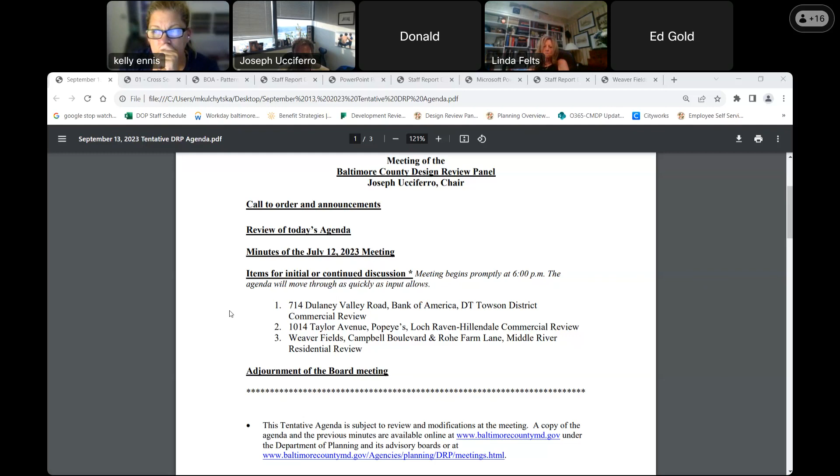Thanks, Joe. Good evening, everybody. My name is Matt Renauld. I'll be helping Joe out here on the project. The first item on our agenda is the Bank of America at 714 Dulaney Valley Road in Towson in the Downtown District Commercial Review. If the presenter could introduce yourself, the floor is yours.

Hello. First, I want to thank the panel for taking the time today to discuss the Bank of America Dulaney Plaza project. My name is Eric McWilliams, a professional landscape architect with Bohler. With me today are Melissa, the project architect with Interior Architects, and Lloyd with CBRE, representing Bank of America. So if we just jump into the comments, there was a concern about the retaining wall.

And Marta, if you would mind jumping to page 13 of the pattern book.

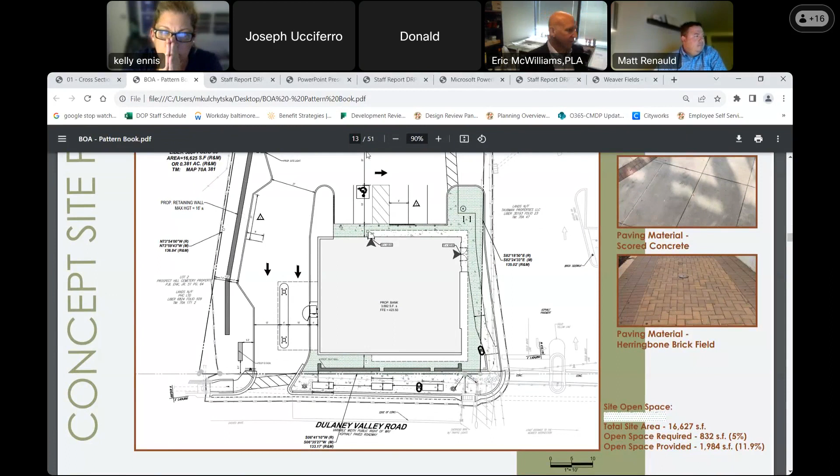So on the left-hand side is the retaining wall for the site. There's currently a retaining wall on the Bank of America site. This will be a reconstructed, rebuilt wall. We've taken the panel's concerns to heart, and we've reconfigured this wall with a maximum height of 16 feet, kind of in the center there. What's to be noted is the current wall curls down, basically touching the SHA wall on Dulaney Valley Road.

We've been able to regrade this portion of the site, widening out the landscaped area where the pylon sign will be. So we were able to pull back the wall 18 feet off the property line from Dulaney Valley Road. We feel this will give ample buffer room to soften the view of the wall from the public street.

This vegetative buffer along the base of the wall extends throughout the whole site. It's about 4 feet where there's parking, but in 2 areas without parking, once you go back beyond that 18 feet to about 40 feet, it's at least 10 feet wide, and we'll be planting larger vegetative material there to soften the wall even more. There's also a bump out behind the main row of parking on the western side of the site.

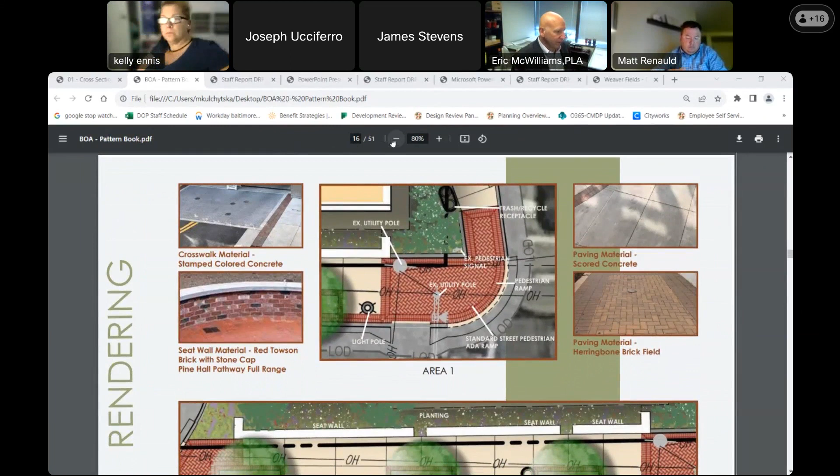If we can move on to the streetscape, page 16. This is in front of the site along Dulaney Valley. It is a seating wall with returns on both the northern and southern portion of the wall, as requested by the panel, and it'll parallel Dulaney along the entire facade of the proposed structure.

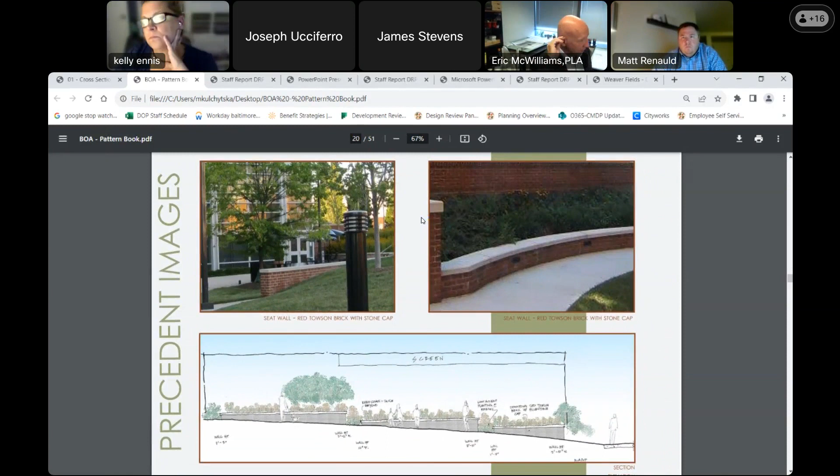If we could jump to page 20, this gives a cross section of how this wall will look along the street. It'll be stepped as Dulaney has a slope from south to north, following that slope with small gaps to give it some air due to the extent of the slope. The height of the wall will not exceed 20 inches, so it'll be comfortable for folks of various sizes waiting for the bus to choose a place along the wall to sit.

Being able to see this bus stop area from my office, sometimes there's 5, sometimes there's 25 folks waiting there, and they sit all over the place and like to give themselves space. We feel this seat wall will satisfy the folks in this area—those waiting for the bus can utilize the seat wall all along the frontage.

To further dig into the bus stop area, there's been mention of a bus shelter, and we feel this seat wall is a great option in lieu of it. The bus shelter would be a bit crammed with the width of the street in this area—it would have to sit back behind the 5-foot minimum sidewalk, in back of the planters, almost shoved up against the Bank of America building, and would tend to clutter the view shed as you're coming up Dulaney Valley, in our opinion.

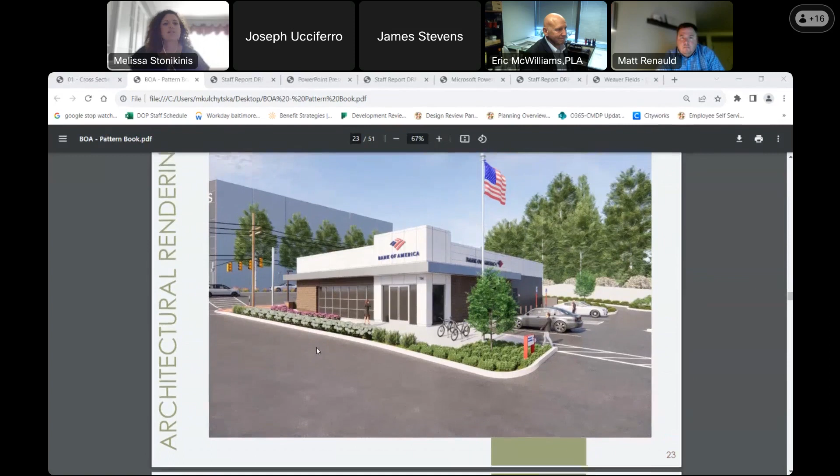You can jump to slide 23, please. On this slide you can see the rendering of the northwest corner of the building and the main entry tower. Here you'll see some of the material upgrades we've made to the facade, including replacing the original wood-look metal cladding with a brown ceramic tile, and replacing the stucco with a full-height charcoal brick around the rear of the building. These changes still maintain our initial facade colors, which align with the bank brand standards, and still complement the adjacent center facade aesthetics, which Taubman Properties have given us support of.

You can also see in this image a little bit of the retaining wall at the rear of the facade, at the rear of the parking lot, and as previously discussed, that's been shortened in height a little bit. You can see those planting areas in front of that, which will provide more visual interest. You can go to the next slide.

This rendering shows the northeast corner of the building along Dulaney Valley Road, and the center entrance. Here you'll see more of that robust planting scheme we're proposing, which responds to the architectural canopy and windows, as well as the proposed seating wall, which we've articulated more to provide pedestrian function and more visual interest with the interacting landscape.

We have maintained the smaller glazing along Dulaney Valley Road in order to promote customer privacy within the private offices, which also aligns with bank security protocol. But we do believe that the variation of the fenestration pattern does help differentiate the more private office spaces from the public open waiting area.

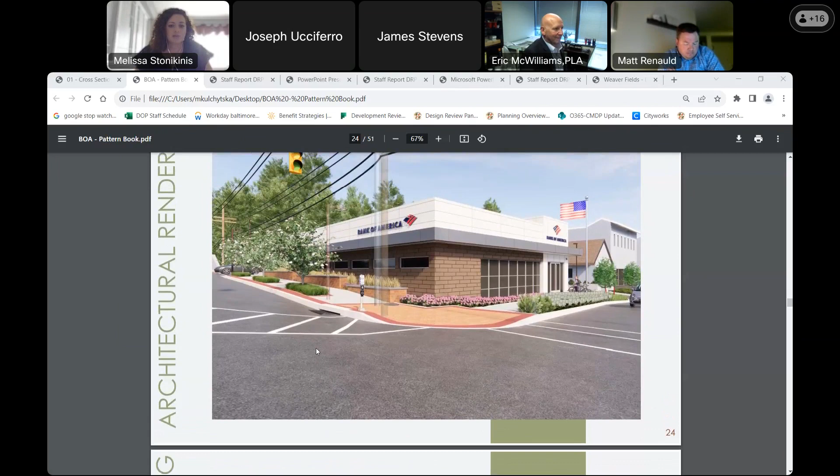Again, you can see a little bit more of that facade material, brown ceramic tile. We also shifted the signage closer to the corner of the building for better visibility.

This view is of the southeast corner and the exit of the site onto Dulaney Valley Road, and you'll see a better view of the charcoal brick that we're now replacing the previous stucco with, and we decided to bring it full height, around the back and with the ATM drive-up area.

Again, you'll see more of that seat wall and how it interacts with the landscape and the building. That seat wall will utilize the red brick to tie into the streetscape, and then a dark gray bluestone cap to tie back to the gray facade materials.

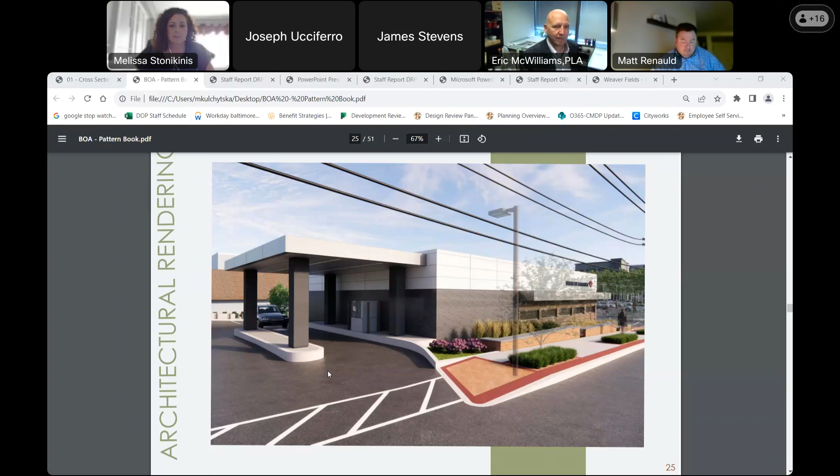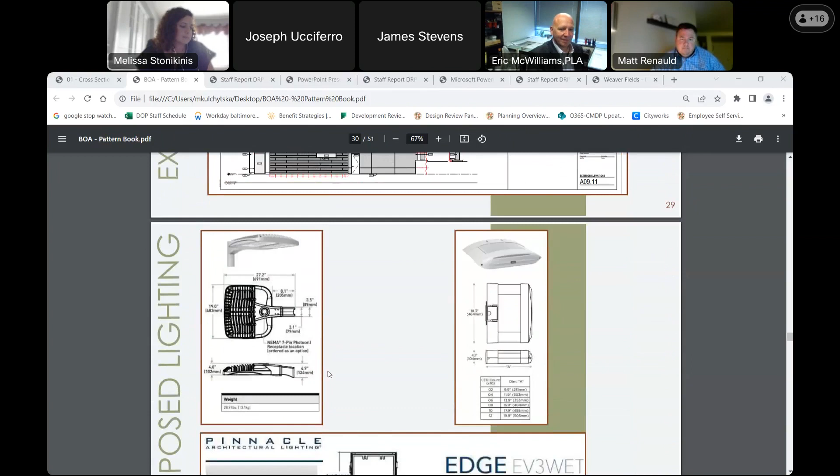There you'll see the new brown ceramic tile and the gray brick. The remaining slides are of our proposed signage, and the only notable changes are on slide 33, the site plan. We're including markings for 3 employee-only parking spaces along the retaining wall, and shifting that building sign closer to Dulaney Valley Road at the corner.

And that concludes our presentation, so I will turn it back over to the DRP.

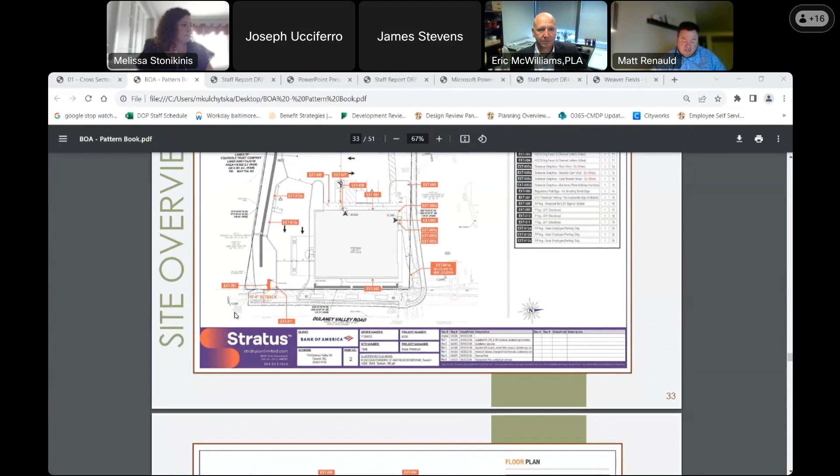Marta, is there anyone signed up to speak on the project tonight? Let me check with Brett and Jen. Brett, do we have anyone? Yes, we have Miss Beth Miller from 523 Murdoch Road with the Green Towson Alliance community group. I think I have to make her a panelist. I'm sorry, hold on.

There's my, hello. Thank you for this opportunity to provide comments on this project. My name is Beth Miller, and I'm submitting comments on behalf— Excuse me, I'm sorry for interrupting, but I would need to start my timer. Beth, are you speaking on behalf of the community?

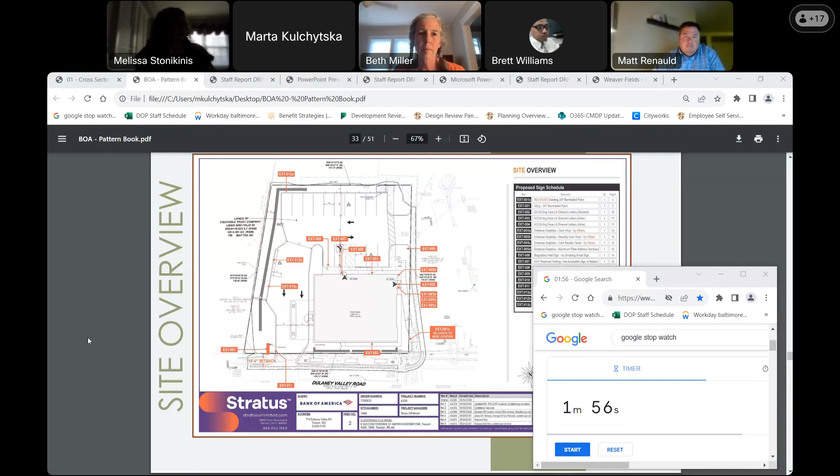I think at this time, if you are able to read the staff report, that would be appreciated. Sure, thank you. So the planning department prepared a staff report, and the report will follow the Baltimore County zoning regulations code references for the project's conformance with the regulations as set forth in section 259.16 Downtown Towson District.

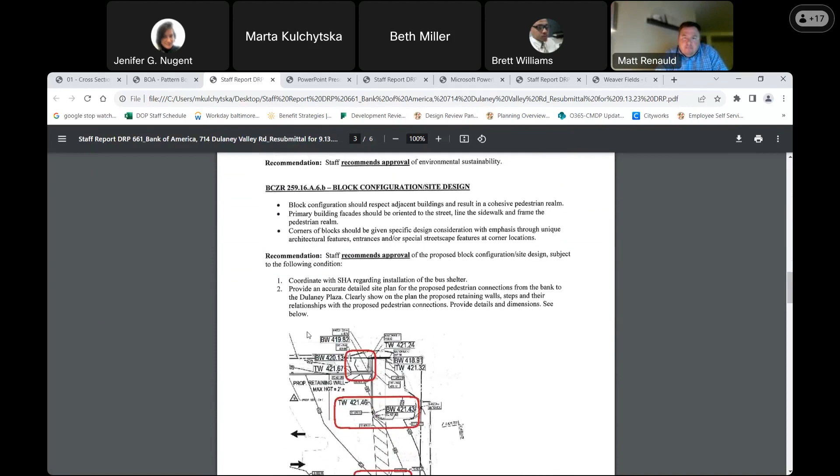In regards to environmental sustainability, staff recommends approval. In regards to block configuration site design, staff recommends approval subject to the following conditions: Number 1, coordinate with State Highway Administration regarding installation of the bus shelter. Number 2, provide an accurate detailed site plan for the proposed pedestrian connections from the bank to the Dulaney Plaza. Clearly show on the plan the proposed retaining walls, steps, and their relationships with the proposed pedestrian connections. Provide details and dimensions, see below. So we provided a diagram below.

In regards to parking, staff recommends approval. In regards to downtown open space, staff recommends approval. And in regards to building principal architecture, staff defers approval of the proposed architecture to design review panel. And in regards to building materials, staff also defers approval of the proposed building materials to the design review panel. And for the signage, staff recommends approval. And for the lighting, staff also recommends approval. And this concludes our staff report.

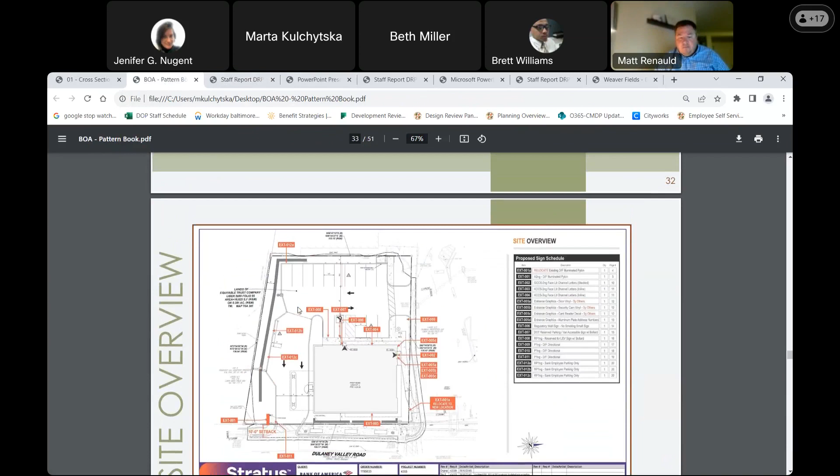Good evening, everyone. Last but not least, it's me. So I concur with the staff report. I have just one question which I want to confirm. Since this is a rendering, is that sidewalk in compliance with ADA? Looks like the tree planters may be eating away into the space that's required for the sidewalk.

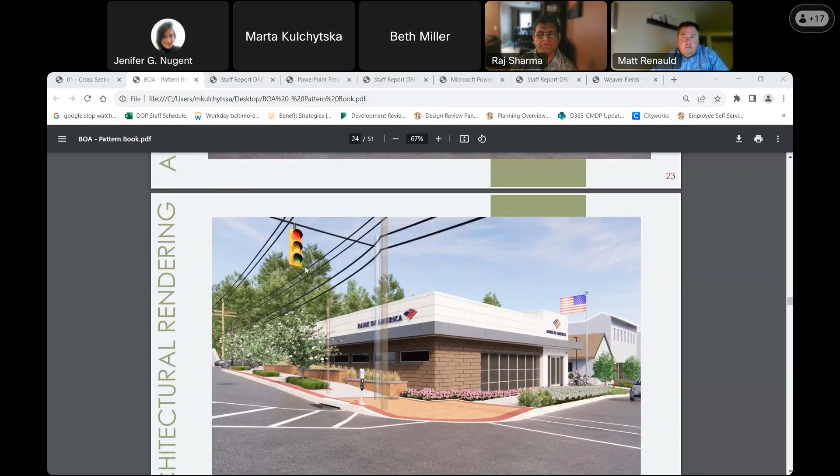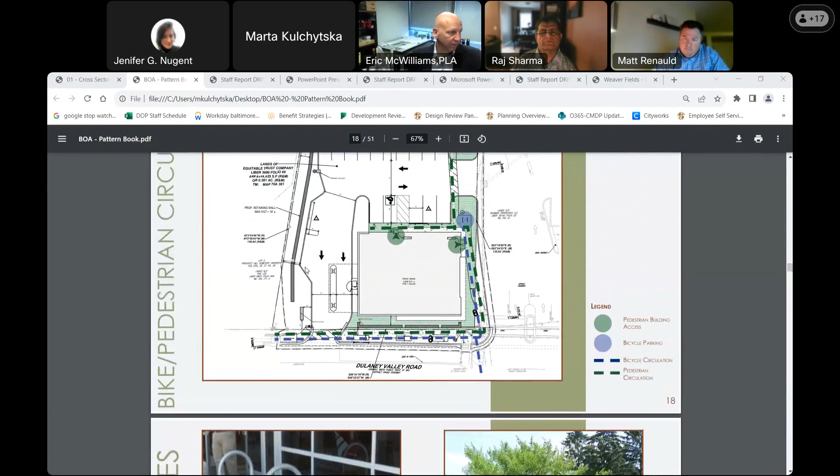Would you like me to answer that? I think that would be acceptable. Please go ahead and answer that question. Okay. Yeah, the site will be accessible, ADA accessible, along Dulaney Valley Road. The tree planters are situated so there will be a minimum of 5 feet between the seat wall and the planter. Thank you, that's good enough.

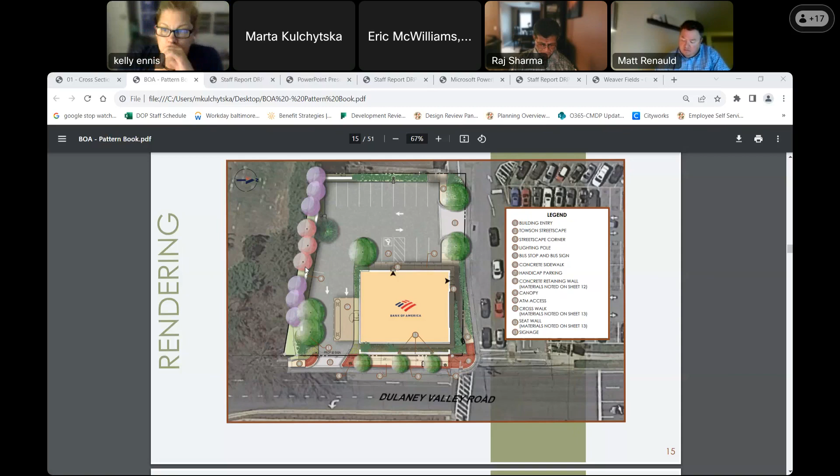And I guess all of my comments are really positive comments. The 16-foot retaining wall has been softened to a degree that I'm comfortable with. Also, the finishes on the exterior elevation, I'm totally on board with. And I must say, the stepped tiered seat wall on Dulaney Valley Road is really a good improvement from the continuous wall that was there on the last submission. So all my comments are positive.

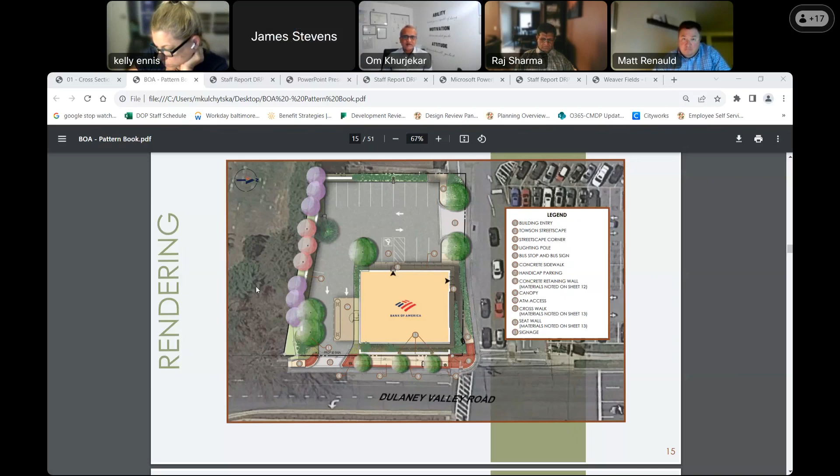Thanks for a great presentation. I think I generally concur with the staff recommendations. I do have a question regarding the materials of the seat wall on Dulaney Valley. I do like the configuration of it, and I appreciate the fact that it is a seat wall that steps down with the grade. The renderings show a lighter or more reddish brick. And when I look at the architecture, is there any way to darken that brick up so it has a better tie with the architectural facade?

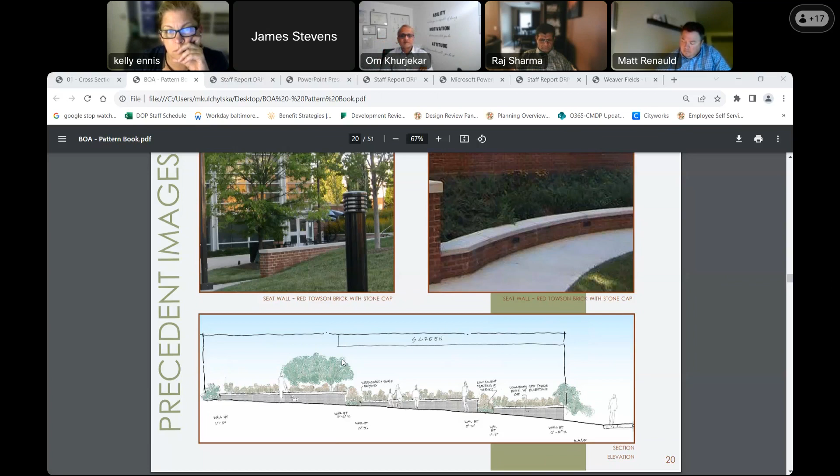I enjoy the grasses behind the wall, and I'm wondering whether in the view that you all showed, that is at the entry, there looks like there is some pink shrubs. I'm wondering whether on either side of the wall there's a way to extend the grasses to wrap around.

And then the third comment I have is regarding the ginkgos. It's just a recommendation for your consideration. A species of trees that may work in those situations would be a sweet gum, not the seedless variety, that is a little more columnar. And that's all I have. Thank you. Great. Thank you very much.

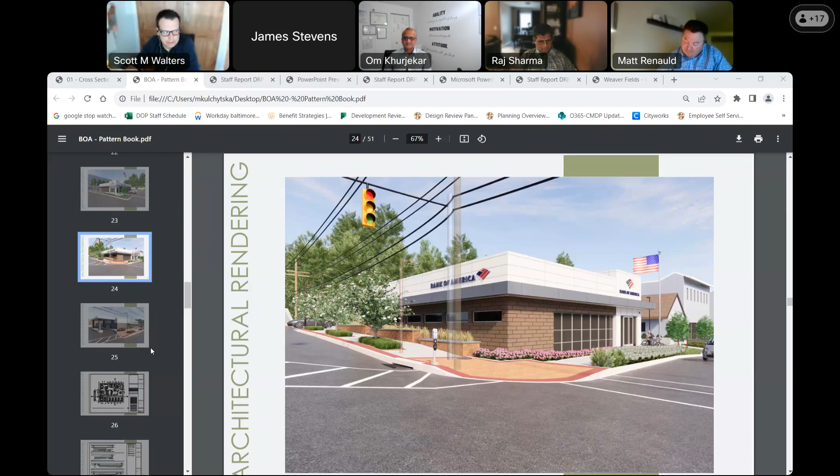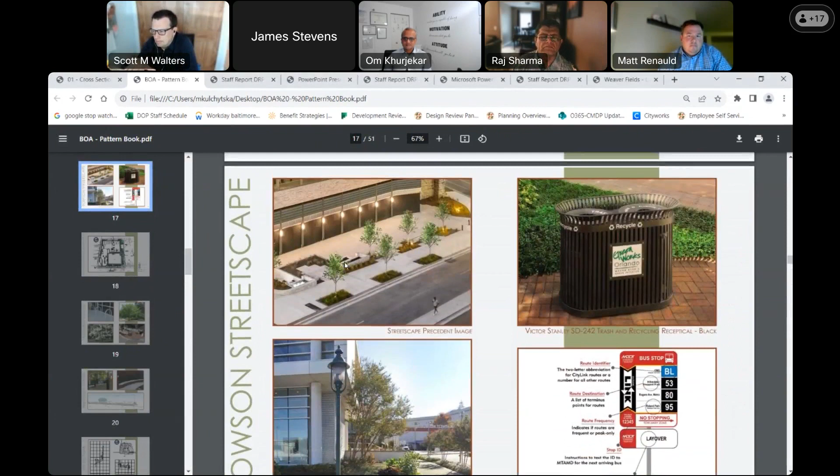With regards to the site plan, I actually like the seat walls and the steppy nature of them. The question is really around the bus stop itself, on I think it's maybe page 16. The three planters themselves aren't equally spaced, but where the bus stop is noted to be is in the thinner section between, if you're looking from the right, the second and third tree, which has the smaller section between the two trees. I was wondering, was there any thought given to giving some hierarchy to where the bus stop and the signage should be between the street trees, in the whole sequence of getting on and getting off?

Would the applicant like to respond to that question, since it's specific?

Just to make sure that I heard the question correctly, your concern is that the area between the two planters that seems to be a little tighter is where the bus stop is, and could we give consideration to perhaps evening up those planters in order to give more room? Is that correct? Should there be more space given to where the bus stop is versus having it be the smaller space between the street trees?

Yeah, as far as I understand it, there would be no issue, I think, from our standpoint as to sliding that planter up a little bit, just to make sure, with the caveat that there's no utility conflicts in that position. But if there are no conflicts, I don't believe we would have any concern at all with giving a little bit more room there for the bus stop.

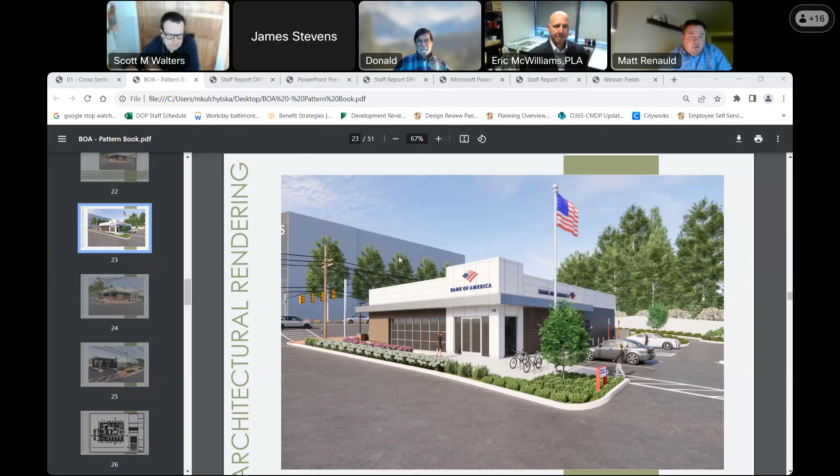I think it's just an item in the rendering, on the corner rendering, the hardscape is showing up as kind of that old Towson yellow brick and the red brick. Can you confirm that it will just be the red brick and not the dual color? Perfect, thank you, much better.

My last comment is regarding the planting at the retaining wall. That is much improved. I would just encourage you to evaluate what you're planting at the base of the wall. I think it's a ginger that you've got proposed there, which is going to be fairly low. I would still recommend you try to get an evergreen shrub along the base of that wall to get 30, 36, 48 inches of height there, just to take the base off of it where you can. It's still a substantial wall, but if you can just land it in a stronger planting bed, that's going to work well.

So those are my comments. So as chair, I'm going to turn it over to my fellow panelists to see if one of you would like to take a stab at a motion for the project.

I would like to make a motion to approve the project with recommendations from the panel. If we're going to do that, you'll have to take the recommendations you want in the motion and spell them out for everyone so they can be in the record.

Okay, I'll try this again. Sorry, my first time. No worries, it's your first time, thank you for taking it on. I would like to make a motion with the following recommendations from the panel. Consider the following items.

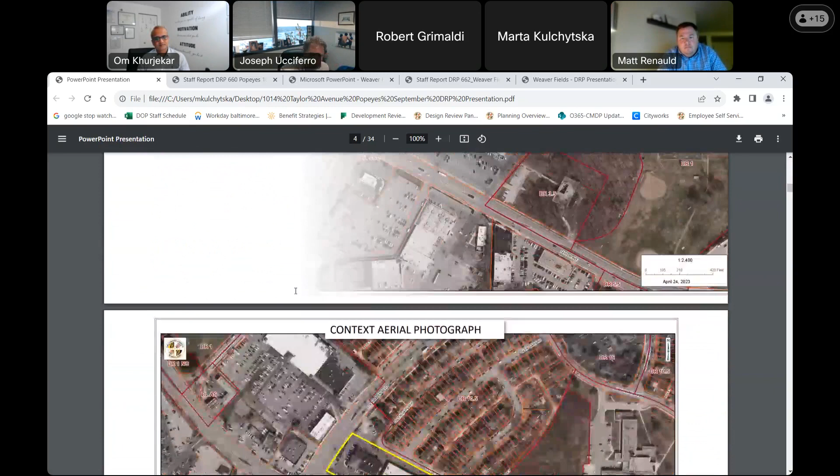You guys have the same slide that I have up right now. Marta, I guess you could start paging through them. Again, we're a 2,500 square foot drive-through, and this is, you can stop right there a second.

I know we have a few new members to the board. That is the site that we're going on. We're in the lower right-hand corner. If you could go to the next page.

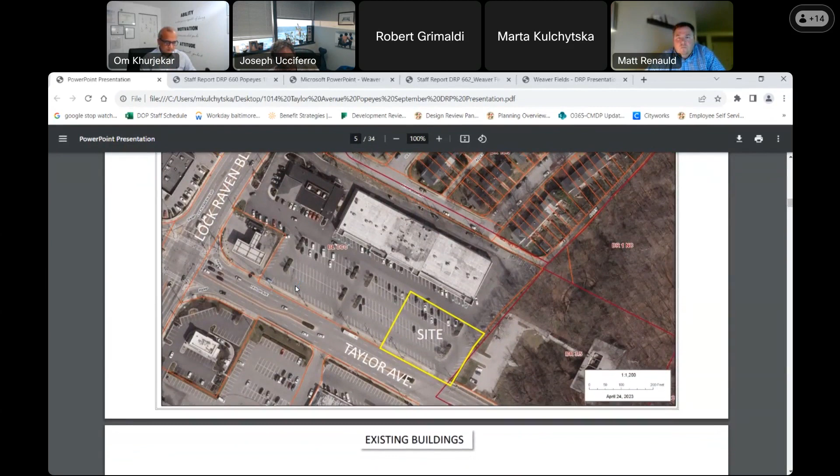And that is the site where we're going on to there. This part of the parking lot drops down, as you'll see in the upcoming pictures and site plans. This is basically the entrance, if you can stay there a second, entrance off the street.

And as you could tell, the site slopes dramatically from left to right, and it also slopes from the buildings towards the street. So we are over to the right-hand side of this, so we have a double point of it dropping. And that'll come into play when you see our retaining wall. This is of the strip center that's behind us.

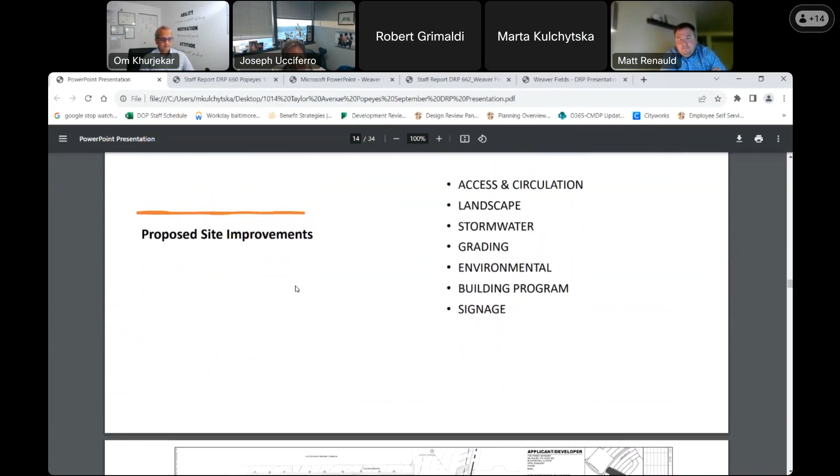Unless anybody has any questions regarding the zoning map, we could move across that and we can come back to it if anything's needed. Stop a second. The next few pages will show the access, the stormwater, the landscaping, grading, environmental, and the building and signage.

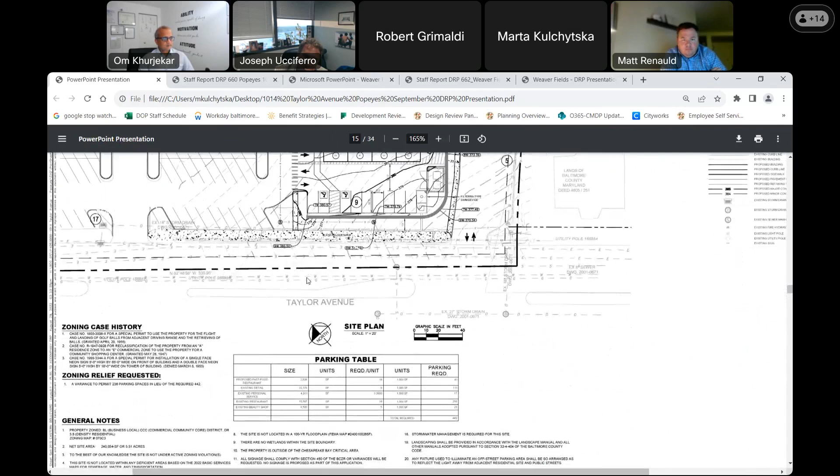Continue on, Marta. Thank you, Rick, again. This is the updated site plan, and actually, Marta, the next one is an enlargement of this. So you could just go to the next one and there we go. So this is basically, we've refined the original plan, slightly adjusted the building footprint, added some additional crosswalks as well as sidewalks, adjusted the planting area, which you'll see shortly, and just refined the plan based upon the comments of the board. You could continue, Marta.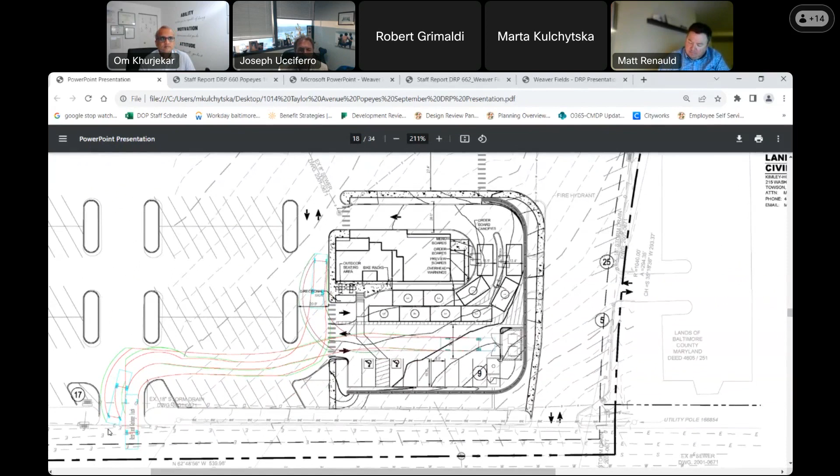And again, the trucks that we went through the deliveries and the trucks that would be servicing this site. Basically, coming onto the site, as you see there, would be the truck to pick up the dumpsters. The only other large truck that's going to come on site, and it usually comes in the time frame of somewhere between 11 and 6 a.m., is the once a week tractor trailer that is the full store delivery.

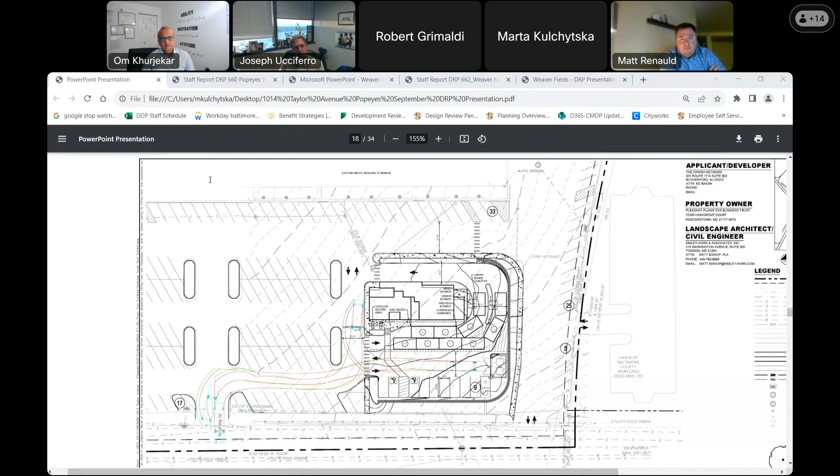The only other trucks during the week are a smaller box truck that comes typically between 7 and 10 a.m. and before the store is open, and that simply could fit in a parking spot, offload, and get out of the parking lot. You could continue along to the next slide.

None of this has changed. These are foundation drawings for the menu boards and overhead detectors and such. Continue on, please. Typical details for the trash corral, showing the materiality and the general construction methods.

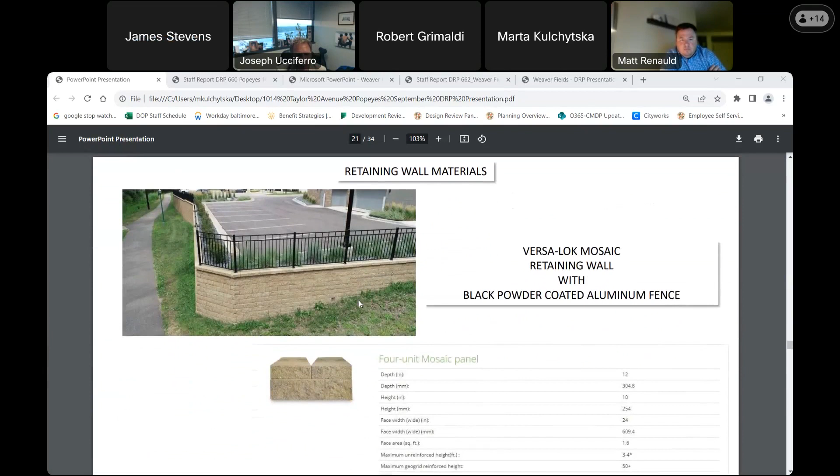This is a specific assembly for the retaining wall. It would be a Versa-Lok retaining wall with the powder-coated aluminum handrail on fence rail on top. Continue on.

Now this is where again there's two sections cut on this site plan, the A section and the B section, and this was the board rightfully asked for this because it was not very clear without these sections about what was happening on this location. If you continue on, and if you could zoom in a little bit.

So the A section is from the street to the strip mall behind us, which is on the top of the page, and the B section is on the bottom of the page, cut parallel with the road. This also helps you understand where the A section falls.

If you look at the A section, you see the existing sidewalk and a person walking on it, and the height of that wall. We tried to soften it as much as we can, but at the A to A1 section cutting through the site and through the B section, the lower section, that would fall between where it says planting and retaining wall.

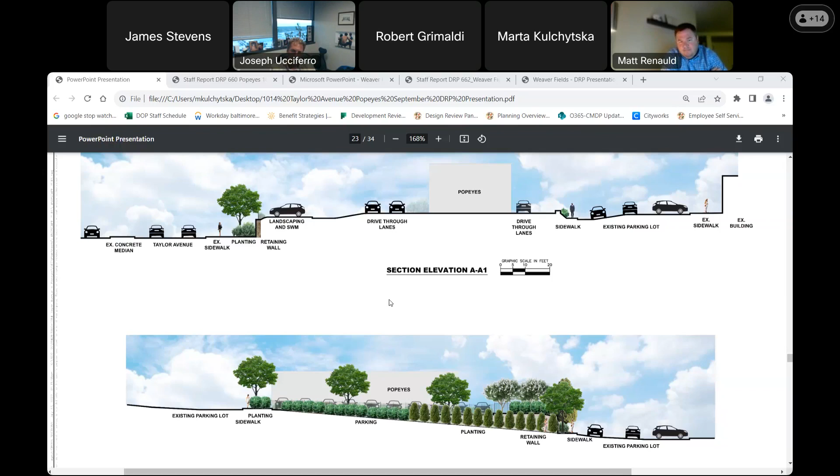Correspondingly, as you drive into the parking lot from the street, the road rises back up to meet the stores in the back. So this is the apex of the height and exposure of the face of the retaining wall.

As you go to the left and back into the site, that retaining wall height is lessened. So in the A to A1 section, we're showing almost the highest point of that retaining wall. Everything past that, both to the left and to the back, gets diminished from that point.

If you could continue on, Marta. And again, I apologize, I'm just an architect, not a civil engineer.

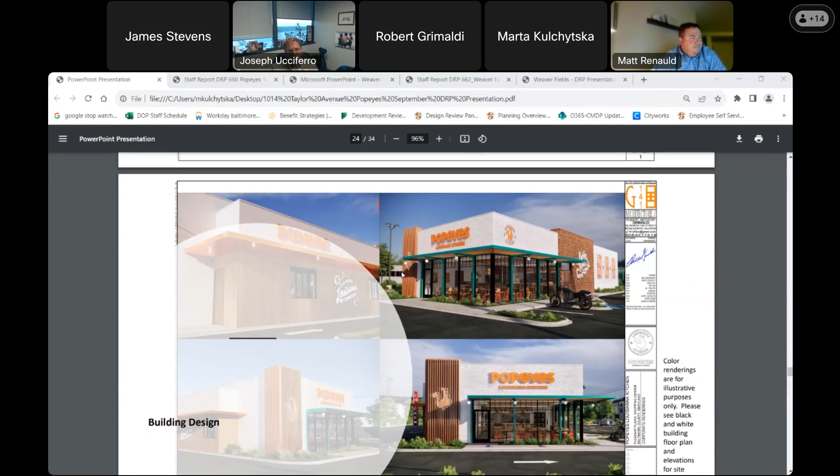So these next few pages are from the prototype design. This is where we had a point of contention, because we had gone through some value engineering from these original designs to what we presented to you last time, and the board was disappointed that you weren't going to get the full gamut of the newest prototype.

So as per your request, we brought back a lot of the features, especially the full awnings along the dining room with the lights and everything else. We had taken that away in the last presentation, but we brought it all back as per your request this time. Continue on, Marta, thank you.

You could keep going, and then we'll get to the actual drawings. Keep going. Okay, if you could zoom into that just a little bit, to that first plan.

One of the board's comments was that, rightfully so, we had EIFS coming down to the ground. It's hard to see in the plan, but if you zoom in more and compare this plan to the original, the building has grown about a foot in overall length and width because we added full face brick wainscoting to the footprint of the building.

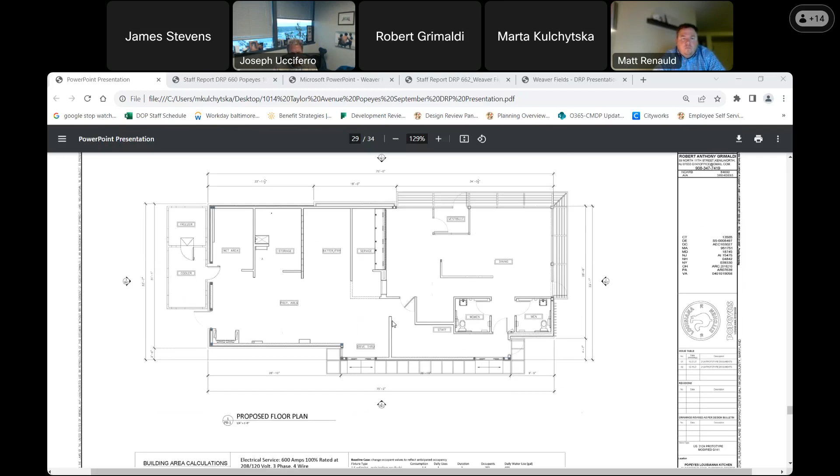If you could continue to the next slide. Keep going so we get the whole view, zoom out just a little bit more. There you go.

So as per the board's recommendation, we added a full wainscoting of brick to the entire building, replacing the EIFS. We did not add the brick in the area of the drive-through for the design presentation, showing the Nichiha panel versus the brick.

It's still a design element that is a branded design element, and as long as the manufacturer's installation for the Nichiha panel is followed, especially since it's up against the curb area and not a planting area generally, we don't have any issue with the Nichiha panel as designed. Hopefully the board agrees with us. Otherwise, we've added the brick wainscoting, full 3.5-inch thick brick, to the rest of the building.

And that's what you see on the top. Stay right here, please, on the top elevation. So that is the drive-through elevation. Again, that's the brick added in the front and the back.

In the middle two elevations, the left-hand side is the front elevation, which we still have. You see the Nichiha panel, you have the decorative wood. We still have above the half-inch thin brick, which is again half-inch actual brick, thin brick. And then the back, the utilitarian end with the cooler box is the EIFS above the cooler, and still the brick wainscoting.

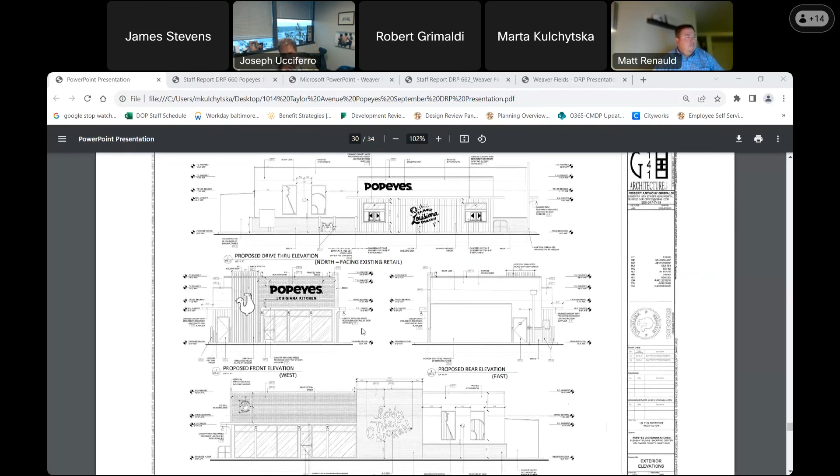And then on the bottom face, if you could zoom into that a little bit, the south face, which will be facing the street, you have the dining room and the full brick, love that chicken wall, and the brick wainscoting that wraps the building there towards the end.

Yep, and if you can continue, I see what the next page is. Those are just the finishes, which we didn't really update because we didn't find the manufacturer yet. We have to find a registered manufacturer for the full brick, but it will be a full brick of the same colorway. And you go down one more, I believe it's the equipment plan.

It's the equipment plan. Again, the only real change to those plans is the thickness of the brick around the perimeter of the building.

And that, you can keep going to the next one. That is just our response letter. Basically we try to reply and respond in kind with all of the requests from the board from the previous meeting. Again, I hope we did that to the board's satisfaction, and I'm trying to keep it brief, so we'll leave it at that.

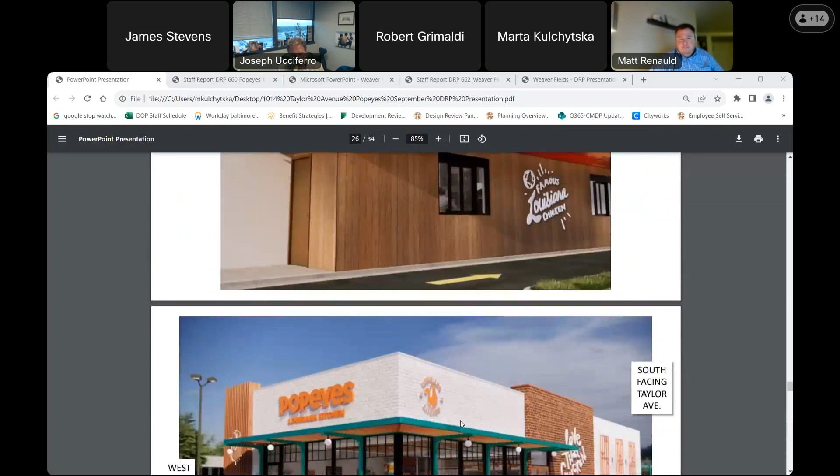All right, thank you very much, Mr. Grimaldi, for the presentation. At this time, I'm going to ask Marta, Jennifer, and Brett, has anybody signed up to speak on behalf of a community group or the community?

Nobody has signed up in the chat to speak. Yeah, I have no one in the chat either. I have no one, Joe.

Okay, great. So let's proceed to the staff report. Marta, would you please pull up the staff report and go through that?

Sure, thank you, Joe. So the Department of Planning prepared the staff report based on the following: Comprehensive Manual of Development Policies, Baltimore County Master Plan 2020, Baltimore County Landscape Manual. In regards to site design, staff recommends approval. In regards to form and image, staff recommends approval. Same in regards to open space and landscape design, staff recommends approval. In regards to streets, parking, and circulation, staff recommends approval, subject to the following comment.

The parking requirement for the shopping center is 442 spaces. With this new development, parking spaces will decrease to 236. The applicant will be filing a request for a variance to permit 236 spaces in lieu of the required 442. In regards to signage and lighting, staff recommends approval.

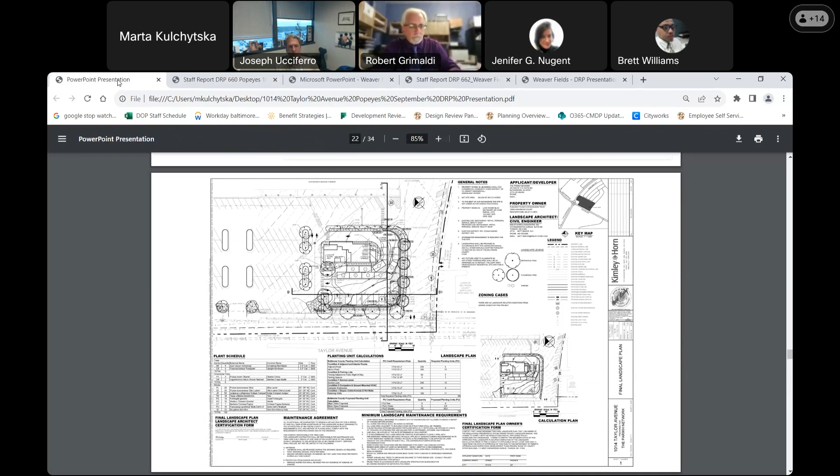Okay, so let's open up the discussion to the panel. I'm going to go in the order that I called roll for this project. So let's start with Ms. Ennis. Do you have any comments, Ms. Ennis? No, I agree with the staff comments, and certainly appreciate the revisions to the branded forms of the prototype, and I like what the architect has responded with. I have no comments on the civil modifications, but everything else I agree with.

Okay, thank you. Let's go to Mr. Khan. Thank you. I agree. I think that a lot of the concerns that we had before have been addressed as best they can, given the topography that they're dealing with on this particular site, and also the clarification of the building itself. So I think it's moved along in a very good direction.

Thank you. All right, thanks, Mr. Khan. How about let's go to Mr. Renauld. Yeah, thanks, Joe. I would echo the comments. Much improved. Thank you for bringing back the canopy. I think that was a signature piece of the building, so appreciate that.

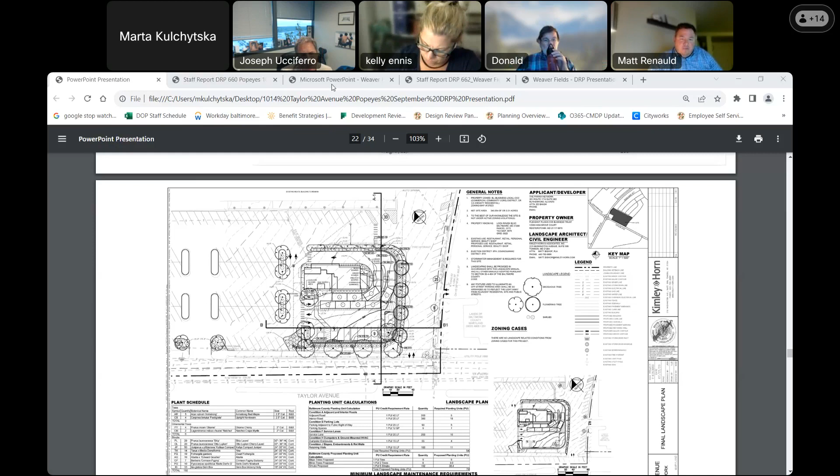Just a couple minor comments. The northwest corner, the circulation around the site is much better. The crosswalk is kind of on the northeast corner of the plan, which makes sense if you're coming up from Taylor Avenue. But if I'm walking up at the front of the restaurant and going to the retail above, it seems like you would want a straight shot crosswalk up through there. So it's just something to consider in the future. Just check your area around the base of the building. You're showing bike racks and tables, and it's a pretty tight condition right around the frontage of the restaurant.

Just make sure that you're able to include all of those amenities. And then, just a minor thing on your next submission with the county, I would recommend you show the extents of the canopy on these engineering drawings. You can see it in the architectural plans, but not on the site plan, just to confirm it's there and there aren't conflicts. So otherwise, just minor comments, but great job.

And yes, the canopies in the front will not extend past the sidewalks, and obviously the ones at the drive-through will just be at the drive-through area. But we'll make it reflective on the plan.

All right, thanks, Mr. Renauld. How about Mr. Sharma? I don't have any comments. It looks good. Great, thank you. Thank you, Mr. Stevens.

I must be in agreement with everyone. I love the integration of the canopy on the main entry, the incorporation of the full brick at the wainscot of the building, and as far as the site and civil items, I have no comments.

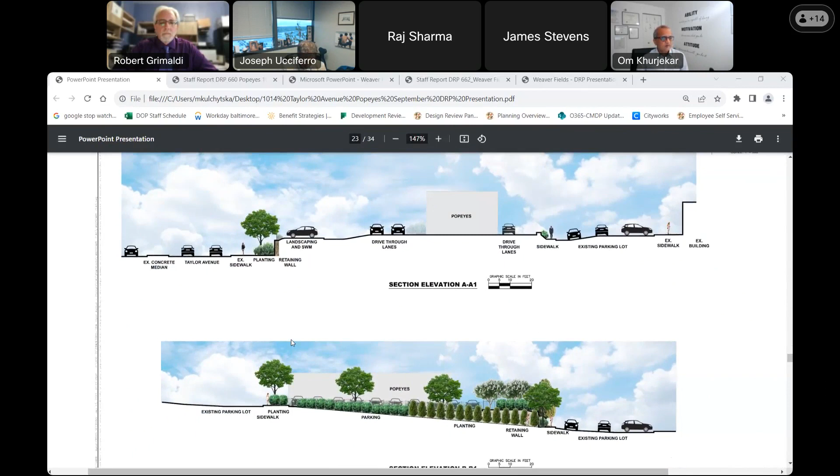Let's go to Mr. Khurjekar. Great presentation, I agree with everyone's comments here and the staff report. I just have one suggestion: the retaining wall, as it gets taller on section BB1 and section AA1, looks like it's over 6 feet tall, and the plantings in front of it — if I'm reading the planting plan correctly, there's 9 OL shown, which are Otto Luyken cherry laurels, which don't grow 6 feet tall. I would suggest using a taller variety of evergreens to give the wall a little more, to match the renderings. I have no other comments.

Thank you, I'll pass that along. Okay, so how about Mr. Walters? Let's wrap up there.

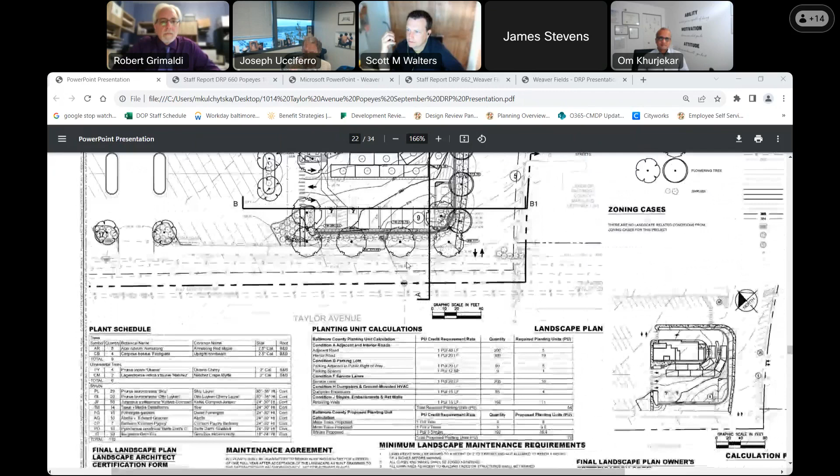Yeah, I appreciate the changes that you spoke about. I just have one question, about the color of the brick and the wainscoting — I couldn't tell what the color of the brick was intended to be.

Keep going down. So basically, it's going to be white because it's staying on this elevation. The natural red brick there, where the I Love Chicken wall is, that color you see there will be indicative of the brick. Obviously, since full brick is not our spec, we have to find a manufacturer, but that would generally be the color of the red brick shown. And for the statement you need, they will be full brick to match the specified thin brick that's on our drawing.

And as far as the wainscoting goes, it'll be a white brick. We're replacing white EIFS with white brick. We used to have a Glen-Gery white brick on an older prototype, but they had manufacturing issues, and I know we switched off to another supplier — I can't remember right now if it was Belden or somebody else — but it'll generally be a white brick to match, to go along with the EIFS. Thank you.

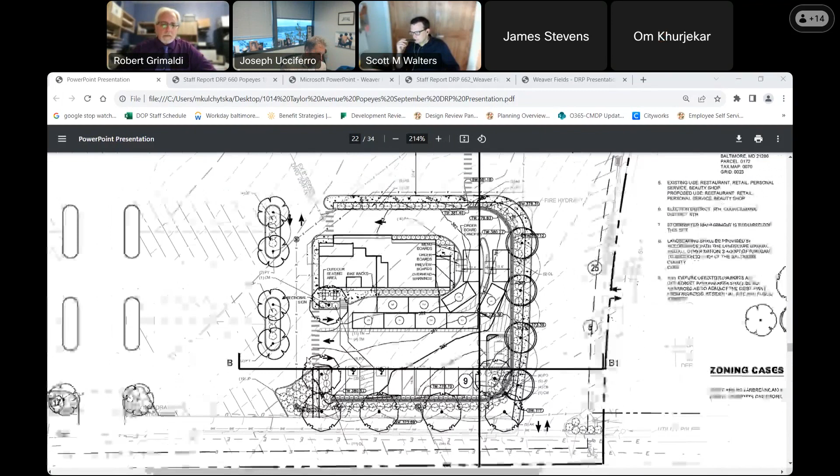So I think that concludes the panel's comments. We're at a point now that would one of my fellow panel members like to make a motion for this project? Just a reminder that the motion can be for approval with conditions, or additional review with a second meeting — but again, a reminder that this is the second meeting, so we'd really like to go with approved or approved with conditions.

So that's the parameters. Hey Joe, this is Matt, I can make a motion if you're okay with that. Great, please do. I would make a motion for approval with just a handful of minor conditions: exploring the sidewalk connection to the retail frontage at the northwest corner, adjusting the plant species along Taylor Avenue, as Om suggested, to get a taller evergreen along the retaining wall, and third, confirming that the extent of the canopy will be shown clearly on the site plan drawings for the county review.

And Matt, just one comment that you did not say from the staff report—I think there's an important comment related to overall parking. Yeah, thank you. So in review of the staff report, just confirming the language here, that the variance for the reduction in parking will be approved per the staff report.

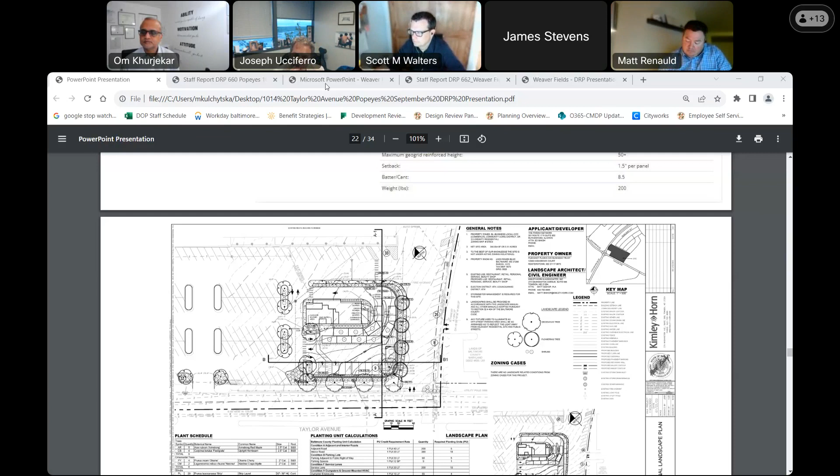Thanks, Joe. Department of Planning staff, is that motion clear enough for the record? Could you please restate it again comprehensively? Sure, I would recommend approval with the following conditions.

Item 1, address the sidewalk connection at the northwest corner to provide a crosswalk to the adjacent retail property. Item 2, address the planting along Taylor Avenue to include a taller evergreen species that works with the proposed retaining wall. Item 3, ensure that the extent of the building canopies are shown clearly on the site plans for county review.

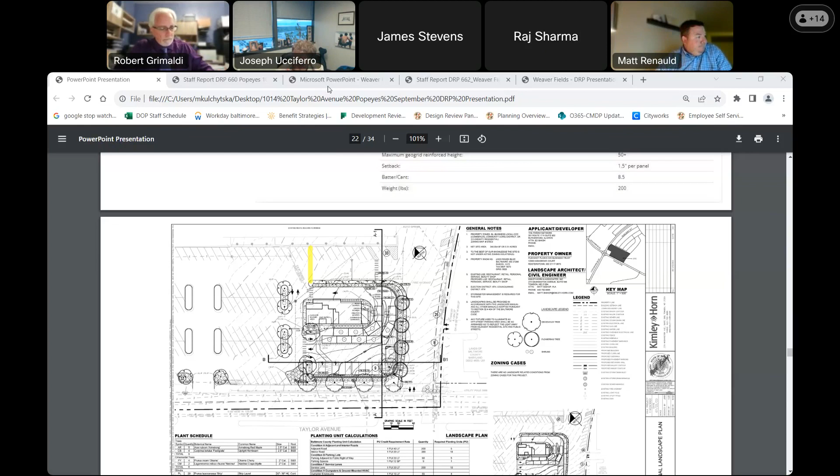Okay, I think that motion is clear. So there's a motion on the table by Mr. Renauld. Do I have a second? Second. Okay, thank you, Mr. Stevens. I have a second. All in favor say aye. Aye, aye, aye, aye. Okay, I think I heard everybody. Any opposed? Great, the motion carries. Thank you very much, and nice job.

Thank you very much, I appreciate the board's time. Sure, so let's move to item number 3, which is the Weaver Fields, Campbell Boulevard and Rowe Farm Lane in the Middle River residential review.

And just a reminder that we have Ms. Linda Phelps as the residential reviewer for the Weaver Fields project, as part of the panel on this particular project. So if the presenters would please introduce yourselves, the floor is yours.

Sure, this is Patsy Malone with Venable, on behalf of the developer. I'm just going to introduce the speakers and I'll be around at the end of the presentation. Sean Davis from Morris Ritchie Associates is going to do the first part of the presentation, and then Ed Gold from Goldstone Properties is going to do a portion of it. And then we have Craig Carlson with Green Spring Builders, who is going to talk about architecture. I'll be around for questions at the end.

So Sean, do you want to unmute yourself and get started? Absolutely, can everyone hear me okay? Yes. Great, good evening—as someone said, my name is Sean Davis, I'm a principal with Morris Ritchie Associates, a planner and a licensed landscape architect. I've been involved in the overall planning for Weaver Fields. I'm going to begin by talking about an understanding of why we're here, diving into neighborhood context, then talking about site planning, circulation, open space, and landscaping. Then I'll turn it over to Ed Gold and Craig Carlson to talk about the architecture.

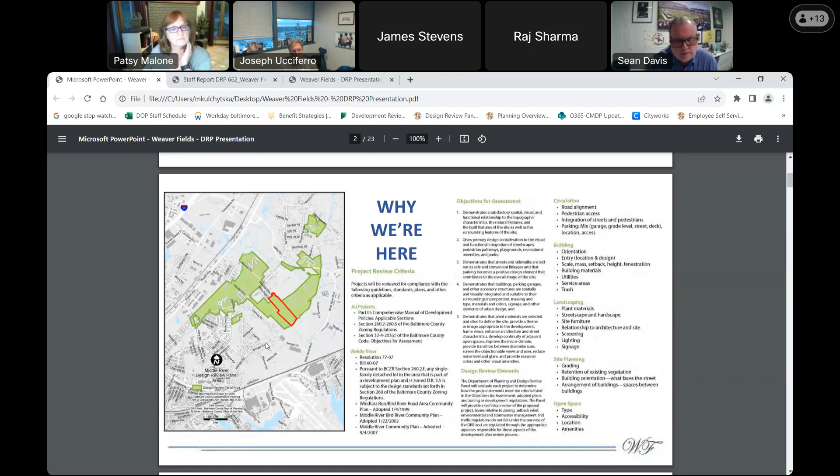So again, we're going to begin with the site planning and circulation, and then we're going to mix those up a little bit in terms of the order of our presentation, beginning with the site plan and circulation, then moving to the open space system, then talking about landscaping, and ending with building. So with that, next slide, please.

Before we dive into the details of the plan, we believe it's important to set the context and understanding of the site's context and physical environment as it relates to how Weaver Fields fits in. So the site, which is identified in red here, is centrally located in the Middle River community.

There is Greenlee. If you go to the upper right side of the page, that is Greenlee. Actually, let me step back. The road that circulates from the north side of the site around on the east side at White Marsh Boulevard, that is Route 43. Campbell Boulevard cuts through the site and connects with Route 43 and also up to Route 7, providing direct access for the project to White Marsh Boulevard and Route 7.

And the project is really strategically located in this area to serve the growing and aging population of eastern Baltimore County. Specifically surrounding us, the site is literally located between the preserve at Windlass Run. And what you don't see here, which is part of the development plan going through the approval process right now, is the Speigel property, immediately to our west, adjacent and directly accessible to Campbell Boulevard. But we have the Greenlee development, we have the crossroads, the Baltimore crossroads at 95.

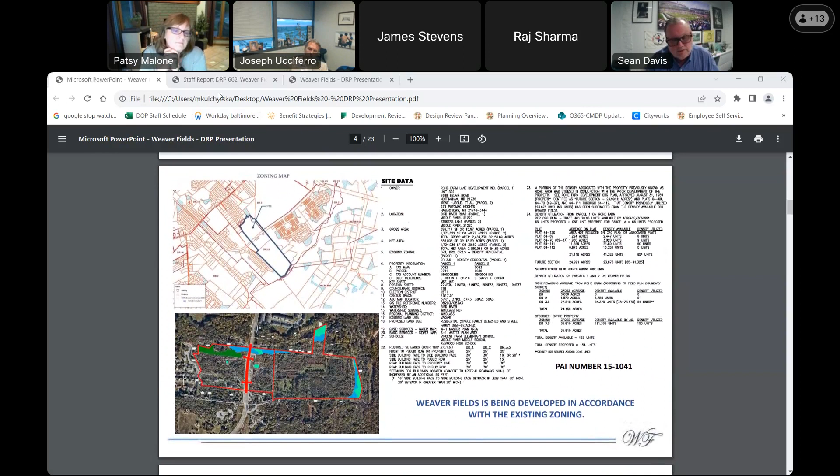Next, we want to understand the regulatory and physical context and features of the site. As illustrated in the map on the upper left, the zoning for the property is DR 3.5, DR 2, and DR 1, mainly DR 3.5. The total property is 56.69 acres.

It's divided into two parcels. There's a small division line, which you can see on both the zoning map as well as the aerial photograph. The property to the northwest is called the Rowe property. The property to the southeast is called the Stoker property. The total permitted density under the zoning regulations is 165 homes. We're proposing a total of 154.

The site data that you see is obviously very detailed. That comes directly from the development plan. It's just contextual for this. But if you look at the aerial photograph, there is a mixture of shrub, old agricultural fields, and forest. There's 24 specimen trees on the site.

What you see in light green is wetlands. What you see in blue is floodplain. And what you see as the dark green is an existing forest conservation easement. Most notably, the project is bisected by Campbell Boulevard, which was constructed within the last 2-3 years, and access points off Campbell Boulevard were provided for the site.

So collectively, the environmental features and the access points off Campbell Boulevard really set up the form for the proposed residential neighborhood. It's really critical, especially those access points off Campbell Boulevard. But overall, it's really important to note that Weaver Fields is being developed in accordance with the existing zoning. There's no PUD or special legislation governing the development of this site.

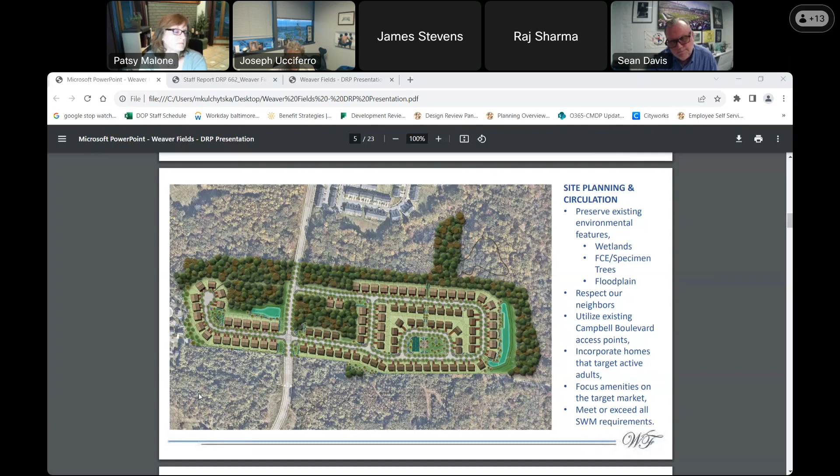This plan illustrates the breakout of the villa units and the single-family detached homes, and also highlights our publicly visible lots. The dark brown lots you see are our villa lots, and there are a total of 102 of them. The orange are our single-family, totaling 52. So we have proposed a total of 154 homes within Weaver Fields, and we are permitted 165, so we are below the permitted density for the community.

There are no homes backing out onto Campbell Boulevard or double-fronted in the community. Again, we were really focusing on providing homes directly adjacent to an amenity. We wanted to maximize those amenity frontage lots, and we wanted to maintain the contiguity of single family. So when you look at this, you'll see the villas are pretty contiguous in the brown, and the single family homes are pretty contiguous in the orange.

And the single family homes at the bottom of this image directly abut single family homes from the Speigel property. Again, trying to respect our neighbors, we've located similar home types. In fact, these are larger lots than what's being proposed at the Speigel property adjacent to our neighbors. The darker brown and darker orange you see are those homes which we believe are publicly visible and will be provided with additional architectural enhancements on the side elevations that reflect that public visibility.

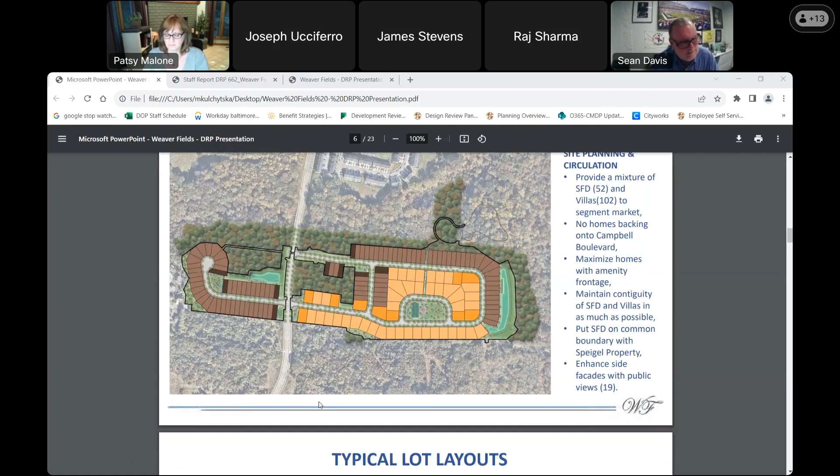Diving into the details of each lot, we provided typical lot layouts in both our development plan and pattern book. We have front-loaded single-family homes, side-loaded single-family homes, with a couple of opportunities sprinkled throughout the community for side-loaded garages for the singles, and then our villa units. All have 2-car front or side garages, plus 2 tandem spaces, so we have ample parking per unit.

From a detail standpoint, all homes will comply with the setback requirements: a 25-foot front yard, 30-foot minimum rear yard, a 25-foot minimum side combined yard, and a minimum of 15-foot side yard for corner lots on the public roads.

Next slide, please. Finally, an understanding of the street, the proposed right-of-way, and its relationship to the homes. The proposed right-of-way is 52 feet wide, including a 30-foot cartway, 6-foot landscape islands or parkways on both sides of the roadway, and 5-foot sidewalks outside those landscape strips. That comprises the 52-foot right-of-way, with a 25-foot minimum front yard setback for parking, driveways, and access.

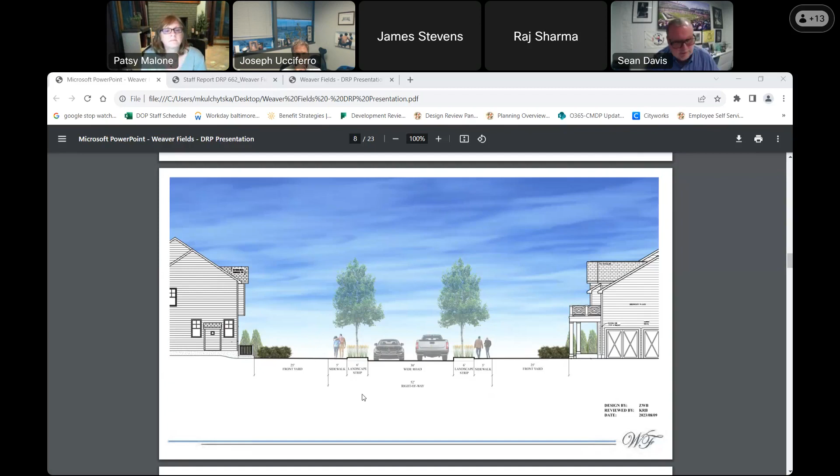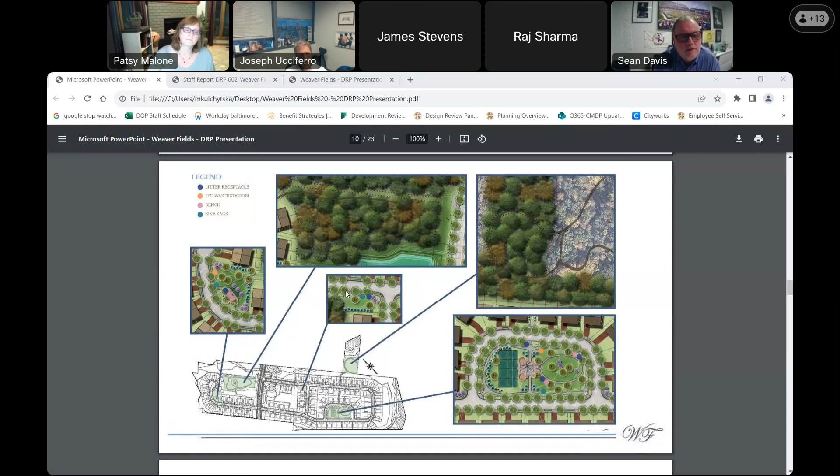Right in the center, you'll see the small pocket park, which is located there. We've got a litter receptacle, a bike rack, and screening for the adjacent use. This is where I'd walk the dog at night. It's centrally located in this section of the community, so it'll just be a nice passive enjoyment site.

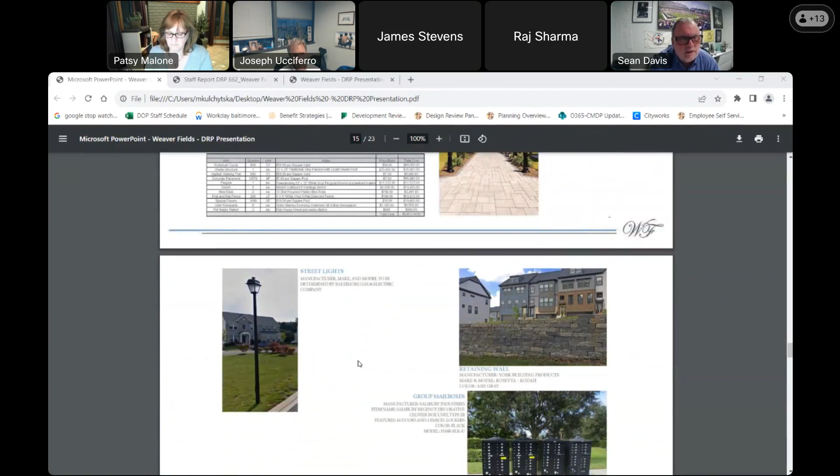The last thing to talk about is the proposed street light. There's a small retaining wall and the group mailboxes that you see here. One more slide, please.

And so that wraps up the discussion regarding site plan and circulation, open space, and landscaping. Now I'd like to turn it over to Mr. Gold to talk about building.

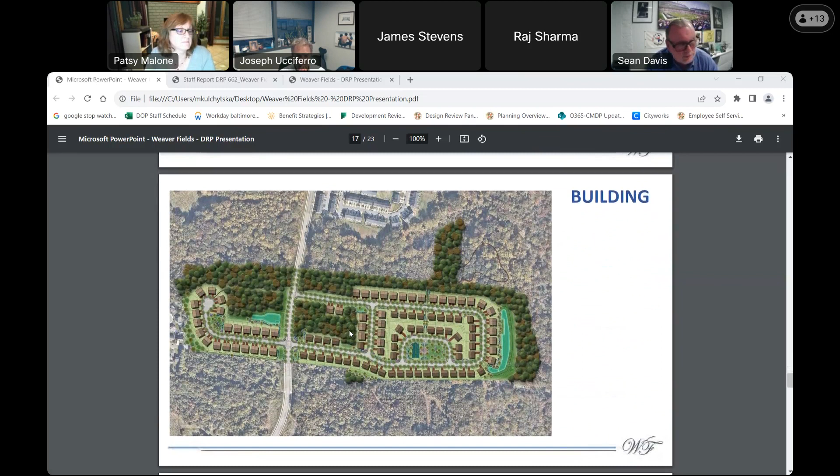Thanks, Sean, and thanks to the DRP for having us here to make our presentation. I'm going to be very brief, and then I'm going to turn it over to Craig Carlson from Green Spring Builders to talk specifically about the architecture. But I want to let the panel know how excited we are about this project.

One of the things we all know is we have an aging population, nationally but in particular in Baltimore County. The one thing I can tell you after 30 years of doing this is we build basically the same thing over and over again, and we expect people to live in the same units wherever we build them. So this project is not your mother's community when it comes to product.

We have 102 villas, first floor masters, a 30 by 60 foot product. My wife and I just recently got back from Columbus, Ohio, where we visited some friends who recently retired there. We actually lived in one of these units for 4 days. It was really spectacular, the way it caters to what we call the 2 to 8 market - those retiring in the next 2 to 8 years.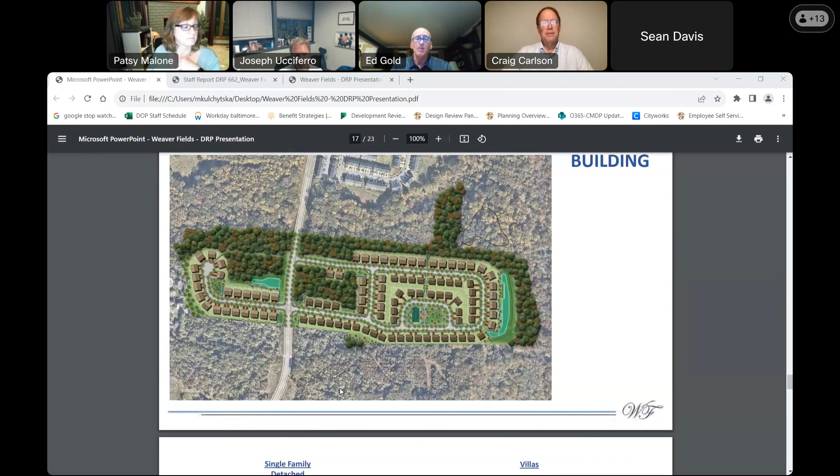So if whoever could possibly move the slides down to bring it up to our single family homes, that would be helpful. They can page down to the next slide after this one.

So what you're looking at here are two different styles. The first one is a first floor owner suite with 3 or 4 bedrooms upstairs. The second one would be a 2-story with all the bedrooms upstairs. If you could page down to the next slide, please.

A similar situation here, where the top one would be a home that has a first floor owner suite with bedrooms upstairs, and then a 2-story again.

One of the things that we found has been a great draw is a modern farmhouse, as well as a craftsman style home. We do not, and nor do we want to build your traditional standard boxes. We try to bring an attractive view where when someone comes to their home, they look at it from the outside and say, wow, this is very attractive, and I'm very pleased with the look of it. So we design with that in mind. We have designers that give input to our architect, and then it brings out these plans that we design. We've been fortunate that we've been recognized through MBIA with several awards on these designs.

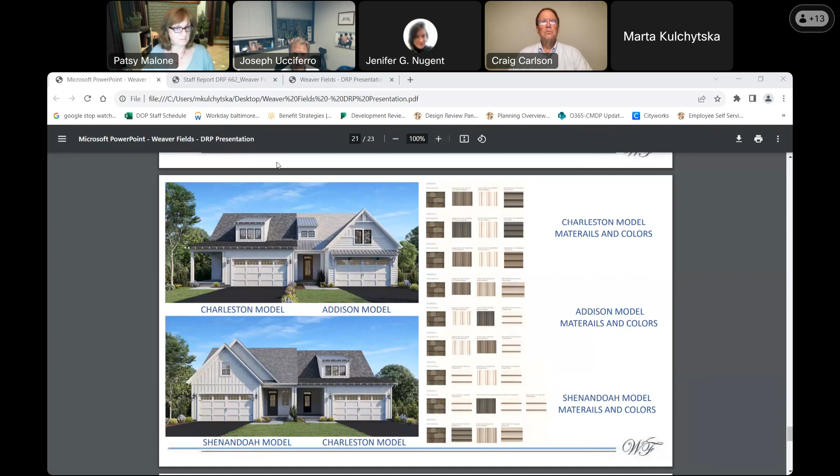So I would think that Mr. Davis would probably be best to address that one. I would love to. I'm just trying to pull up our development plan so I can say.

I think keeping up the landscape plan for the community member to see would help. Perhaps he could orient us if he's on the left or right side. You said unit 1046 and 1048, wherever the development is backing up to Oldfield Court, which I'm not very familiar with. Not sure if that's over on the left side here, west of Campbell Boulevard, that little pod.

Sean, it has to be on the west side of Campbell, all the way to the left. Yes, it is. I'm sorry. I'm looking at the aerial right now, and Oldfields is the court bulb that ends on the left side, so you can see the bulb right here. So if I can go to - I can't bring up the development plan, but...

There are some existing trees there. Some will be retained, some will be removed. Obviously, there will be additional plantings provided there, but we have maintained - I'm trying to determine the exact buffer. It looks like it's a 30 to 40 foot buffer between the home at the end of the cul-de-sac on Oldfield Court and our units. What we're showing is units 11, 12, 13, and 14.

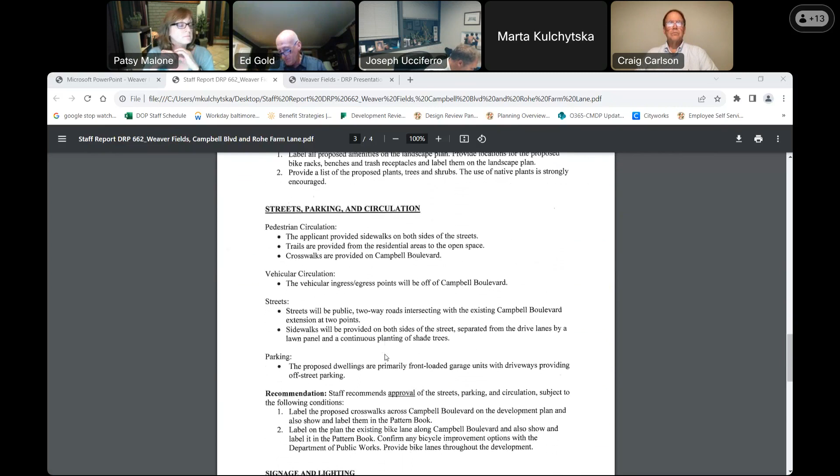In regards to streets, parking, and circulation, staff recommends approval subject to the following conditions: Number 1, label the proposed crosswalks across Campbell Boulevard on the development plan and also show and label them in the pattern book.

Number 2, label on the plan the existing bike lane along Campbell Boulevard and also show and label it in the pattern book. Confirm any bicycle improvement options with the Department of Public Works, provide bike lanes throughout the development.

In regard to signage and lighting, staff recommends approval subject to the following condition: number 1, indicate if the proposed signages will be illuminated.

In regards to architectural design, staff recommends approval subject to the following conditions. Number 1, provide additional color choices for the proposed building materials. And number 2, demonstrate in the pattern book how the proposed garages meet the following requirements outlined in section 260 of the Baltimore County Zoning Regulations.

This section reads as follows: attached front entry garages associated with single-family attached and semi-detached dwellings shall not exceed more than 45% of the width of the front building facade. Garages may project up to 8 feet forward from the front facade of the building unit.

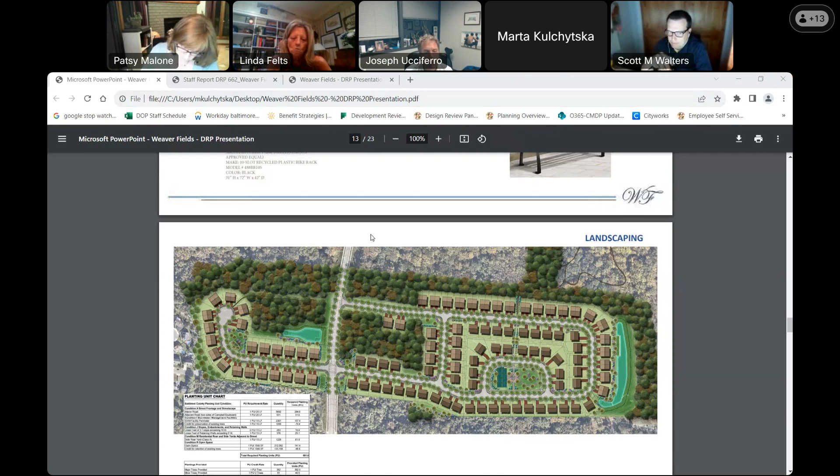From my 3 comments, first, I think individually the villas are really well proportioned, put together, and have a nice architectural quality. But when you start to put the 2 of them together side by side, I think they're a little awkward where the 2 different styles meet together. Marta, there were a couple slides at the front of the presentation where you can see both. Individually the villas look are very well thought out, but when they start to match with another style next to each other, where the roofs, or maybe it was further down, the roofs hit each other, where the dormers may be very close to the center line, it feels a little awkward to me when the different styles meet.

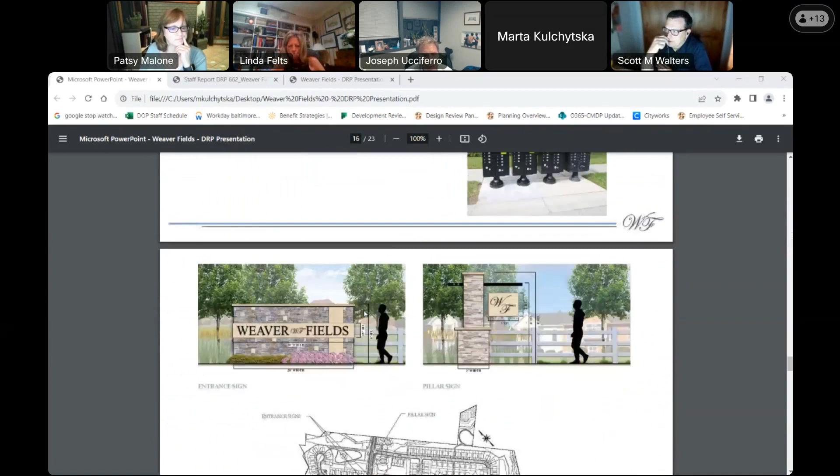See, maybe one more. Yeah, is it good, like the dormer on the Addison model, or how the roofs are close but not quite on the Shenandoah and the Charleston model there at the bottom. They just feel a little awkward to me where the different styles meet, as opposed to when you see them standing alone.

And then, Marta, if you could go up one slide or two slides, the other direction, one more please. On all the single family homes, you have 4 — all except for the very first one have 4 materials, of which generally 3 of them are unique, and there may be a different color of one of the sidings to make up the fourth. But the first model actually has 4 separate materials, and it's the only one that does. I wonder if it's busy and has one too many unique materials compared to everything else when you try to make the composition.

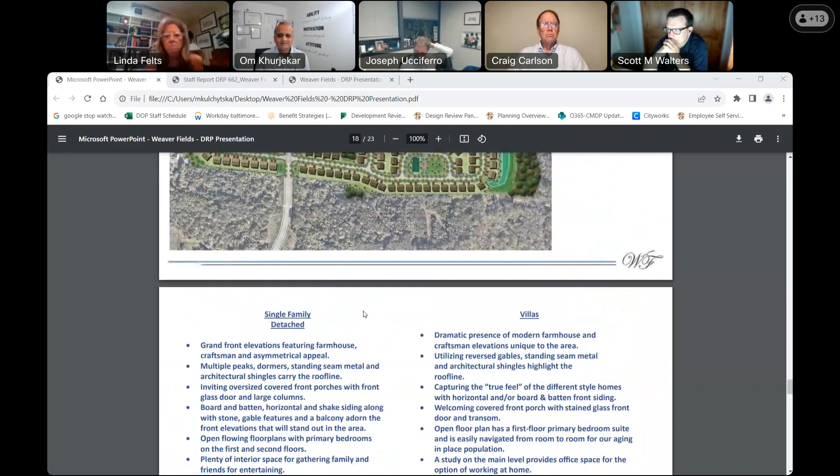I really appreciate that you're preserving a lot of trees, especially the fact that you're preserving 22 of the 24 specimen trees in that center green. When I look at the plans, there is some topography, and to that effect, I appreciate the trail system you're introducing. The walking trails are really important, and considering the purpose of this development, I think that's a great feature to have. My question is, is there any way to incorporate another loop into the central green space?

You mean the parcel directly adjacent to Campbell Boulevard? Stop right there, yep, right there. Is that the parcel you're talking about? Yeah, the one that is shown.

There is a loop on the left-hand side, on the west side of Campbell Boulevard. The one in the center, from what I understood, was the area of the preserved specimen trees, and there's a lot of topography that I can see. Is there a way to incorporate another small walking loop so as to bring people closer to nature and build a series of walking loops that provide different experiences?

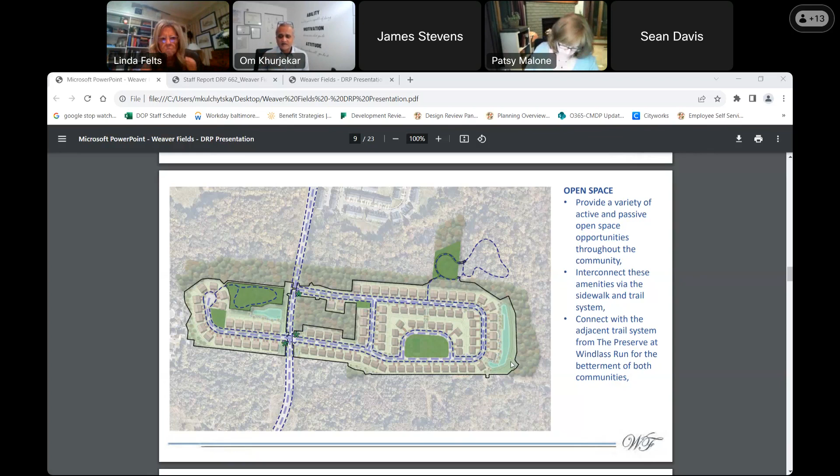The third question is, again going back to the woods and the hierarchy of these natural areas, the way you've laid it out is great. However, on the east side of Campbell Boulevard, in the single family houses, I see there's a storm drain that runs between the layout in the form of a C. You've exceeded the number of planting units on your plan, and I appreciate that. Is there a way to add more shade trees in between these units to give them more privacy, as they'd be looking at each other's windows.

There might be a technical issue, which I understand, but I'd like to get a discussion or a response. Yeah, I think we can definitely take a look at it. We have drainage easements behind all those lots that we have to respect, but the actual illustration really calls out that that area has been cleared, and it would be great if we could provide some planting units back there to break things up and provide some privacy to those units. So we'll definitely take a look at it.

Great, thank you. One last comment is that, and I know the images are representations of what you're thinking, but the gazebo structure in that central open space where the pickleball courts are, looking at the character of it, I was really drawn to the architectural character of the homes. I personally love the farmhouse style, and I feel like there is an...

Wait, stop. Go back up to number 11. Yeah, go back up if you would, two or three slides. Yep, you just passed it, Marta. One more, one more, one more. There you go.

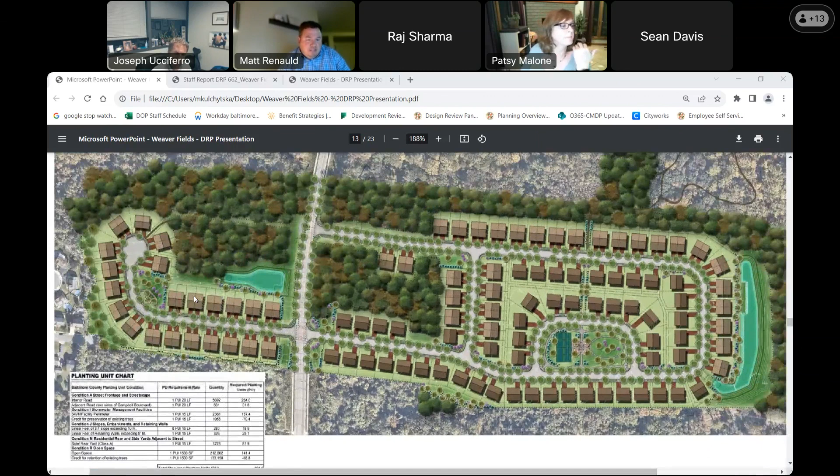Hey Joe, yeah, I echo Om's comments about the open space system. Just a couple questions regarding that. On the left-hand side there's the active pocket park on the cul-de-sac. I see the grade at that northeast corner of that triangle. Is there any way to connect that back to the open space trail system? It would really make your open space feel twice as big if there was a way to sneak a pathway through there. So that's my first comment, and I'll go through these and then let the applicant speak. That's the first location. The second is at the main park on the eastern side.

Marta, if you can scroll over there. There's the oval park space, it has access at the gazebo we were just talking about, but there's no other way to get to the circular park. So I'd envision residents will probably start walking through the grass. I'd either recommend creating more connections to that ellipse, or removing it and having just the perimeter walkway the applicant described, meandering around the park space, letting that be the walkway. So right now the way it's laid out just seems like it's not quite usable.

And then building on Om's question regarding the trees to the left, the tree preserve - a question for the applicant: is the second road entrance needed on the north side of those trees, or could that road stop and be a cul-de-sac at the two villa units, which would allow the tree preserve and open space to connect through there and not have that cut? And then the last one - the trail on the western side of Campbell. Does it have the ability to connect to Campbell Boulevard so residents could loop and walk along the street, creating that loop versus having to cut back through the community? So just four quick questions for the applicant.

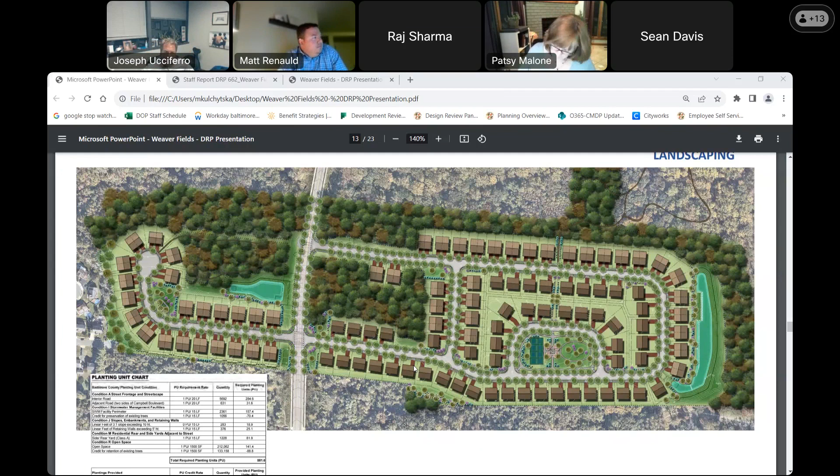Thank you. I think overall the plan, as our discussions have gone along, is really successful, and I think you've done a great job taking advantage of this particular site. The concern, I guess one question I really had, as the staff wrote, which we haven't answered, but I think Patsy was going to answer, is about the garages.

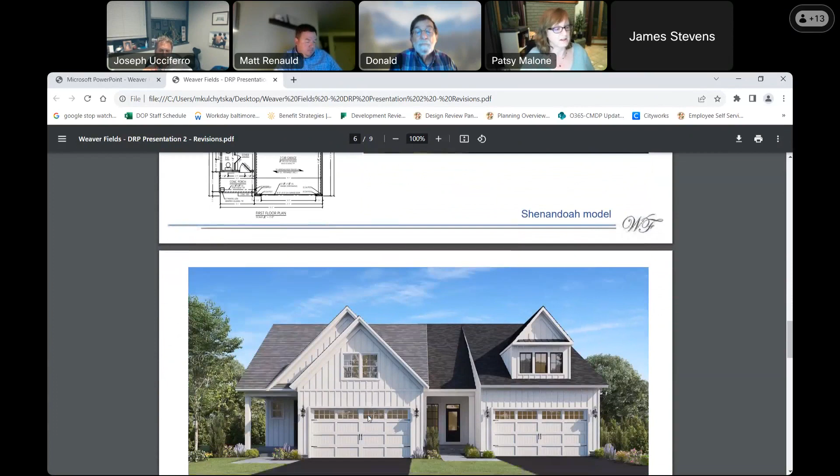If we scroll through just a couple of these, you can see that each has been reduced, and the floor plan next to it will show that, along with the 6-foot garage door. Each of these has been updated. They actually got these finished today, just to show you the reduced projection with two units put together.

I know that doesn't address any of the comments made today about the villa units, but these show the additional color which the planning department had requested. Hopefully that answers your question about the garages. Again, we would suggest the requirement of 6-foot deep front porches and architectural style garage doors.

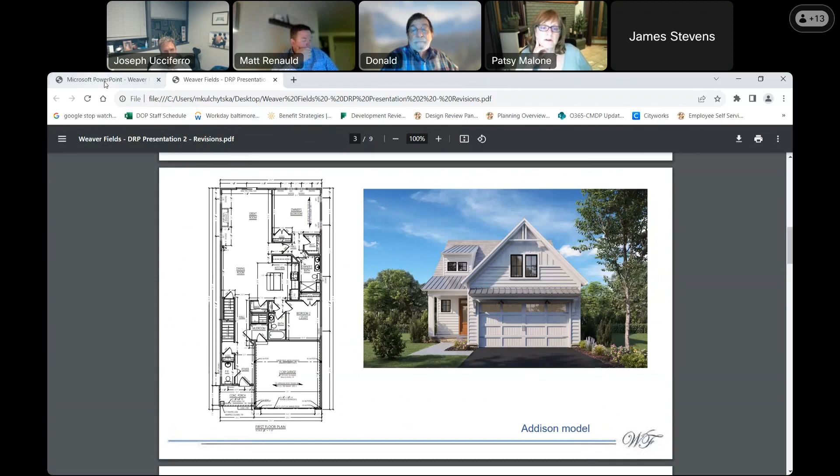Thank you. Yes. So overall, I think, again, it's successful.

I would hope that the patterns used for these buildings, particularly on the side-by-side models, are thoughtfully put together. It gets a little awkward, as we've said, when some of these models are adjacent to each other. If we're being asked to broadly approve this, I would hope the staff would be able to direct some of that. In some cases there are shutters, in other cases there are not. As sophisticated as the concept is, I think the buildings currently fall short of being as successful as the overall site plan.

And that's my comment. Sure, thank you. We would certainly work with the planning department as the project moves forward, and I guess I would ask their advice on how to handle that issue.

If I can interject, this is Jenifer. I'll turn my video on. Sure.

Because this is a major subdivision, the planning department will have to review the development plan and the development pattern book and make a report to the ALJ, in addition to the panel's recommendations. We already take a scrutinized look at the architecture to make sure it meets the Manual of Regulations, section 260.6 of the CMDP. When Patsy was explaining about the garage door width, offsetting that impact with certain types of architectural treatments are the kinds of nuances and compromises we work through with the applicant. So we will do that at the development plan phase, prior to the ALJ hearing.

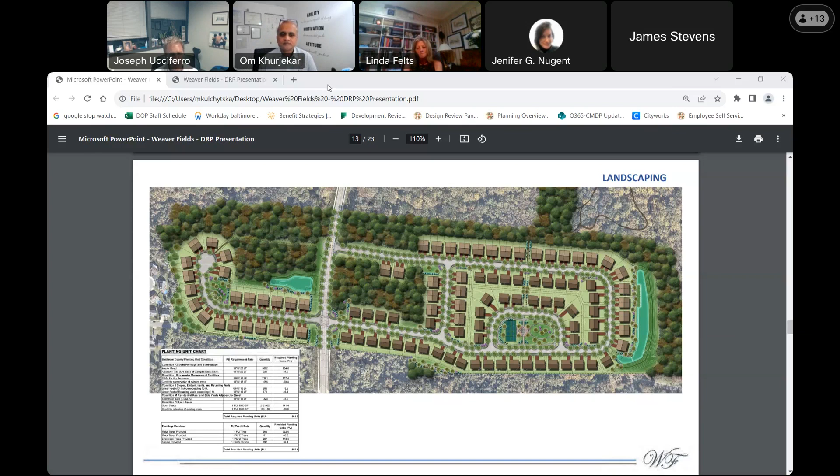I would like to make a motion for approval with the following conditions or recommendations for the team to consider: consider a trail connection through the roadways, consider looking into the central wooded area to provide a pedestrian trail connection, consider an architectural style for the outdoor structures and amenity structures to be compliant with the architectural character of the development, and...

I think that's all I had, as well as the recommendations of the staff report. Is that — I think you said as well as already recommendations of the staff report. I did start with that. Thank you.

Department of Planning staff, is that clear enough for you? Just wanted to clarify, no need to come back for another review, right? Yes, that would be a conditional approval. I would like to state that the team does not need to come back for another review.